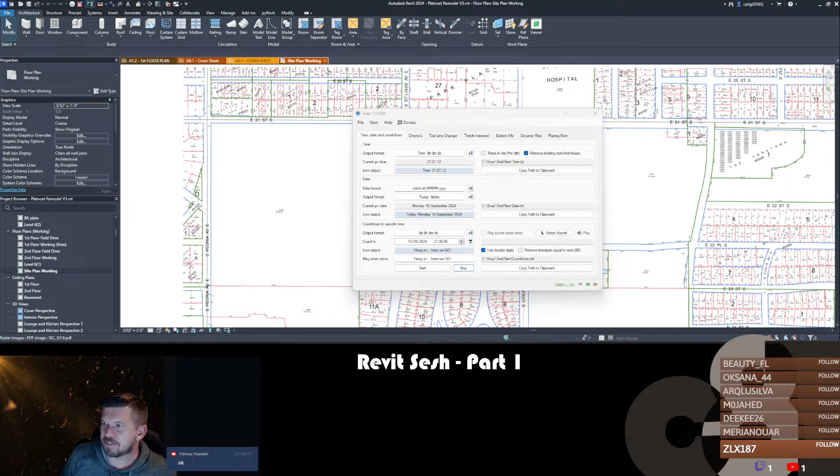This is going to be a session that is mostly for our friend, Mr. Sketchy, and so I'm going to be dealing with some of the questions that he's asked. But we will also have time in chat, if you have questions, to ask any questions you might have about Revit.

So with that in mind, I'm going to take one last stab, although I know you can't talk, Sketchy, so maybe it doesn't even matter that I cannot promote you to a stage moderator, but that's okay.

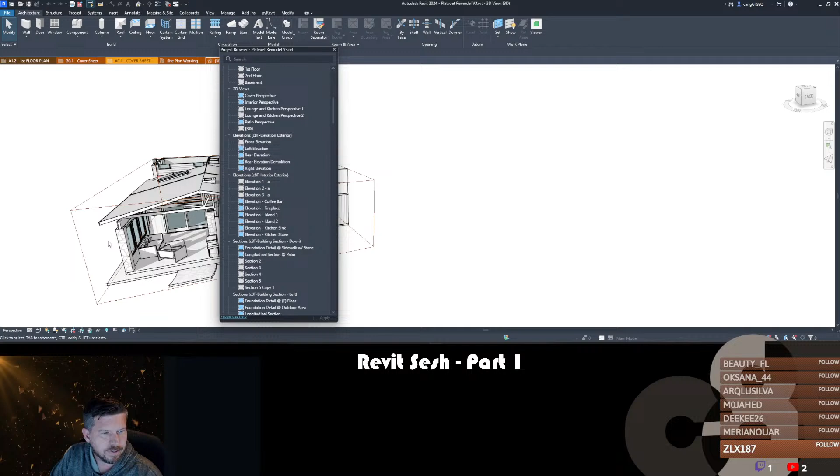And you can make it to where these panels are tabbed. Well, there we go. So now they're tabbed down here. It's a little finicky because now if I pull that out, you can see that the tabbed panels are still combined. So I actually have to rip it out of here and then redock it and then redock this. It's a little finicky. You have to kind of play around with it. There we go. And now I've got it back the way that I want.

All right. Obviously, this is your canvas, just like we talked about a second ago. Below the canvas is your canvas options. So your view options are down here. You can see that this view is in perspective mode. If I switch it to orthographic, it will show the scale. So if you're in an orthographic view, you'll show the scale down here. So if I go to a first floor plan, the scale is shown here.

You've got things like your detail level, what the view style is, hidden line, shaded, all that fun stuff, sun path, all this stuff that you can turn on and off in the view properties. This is almost like a quick access toolbar for your view properties. So that's kind of what you're looking at there.

Let's see here. Below that, we have a few things. In the bottom left, you can see it says click to select, tab for alternates, blah, blah, blah. This is going to be your informational toolbar. So like in AutoCAD, when you start a tool, you get information about how to use that tool. So if I start the floor tool, you can see here that it is now telling me pick walls to create lines. And the reason it says that is because of the way the floor tool is set up here.

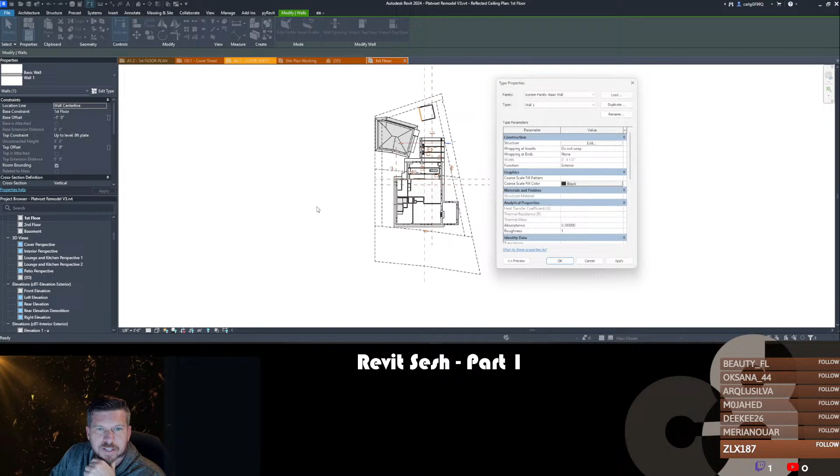And also when you select an object or when you enter a tool, your ribbon's going to change, and you're going to get a new context ribbon. The context ribbon is almost always going to be this green color. Depending on what you select, it's going to give you more context about what you have going on. So for instance, when I select this wall, I have the option to edit the profile, set a wall opening, attach or detach, things like that.

However, if I start the wall command, you can see that the context menu is more about the tool placing that wall. So what shape do I want to place it? So you want to pay attention to that when you start commands. You also want to pay attention to this options bar, which is right across the top. You can actually dock that at the bottom if you right click it. So if you like having those options at the bottom, more AutoCAD style interface, you can do that.

I will say that having it docked at the bottom does present some bugs occasionally that the only way to fix is to reset your user interface, which is never fun if you've done interface customization. So if you're working in Revit and you can't seem to find these things that you're used to seeing, look around, see if somebody's played with the interface, made some changes, things like that.

Okay. I did want to talk about the view tabs real quick. These tabs are just like browser tabs. You click on a tab, it takes you to that view. I have an extension that allows me to colorize different projects so I can see which tabs belong to which. As Dum Dum mentioned, they use PyRevit. This is an extension that automatically colors the different projects. So you can see I've got 3 different projects open.

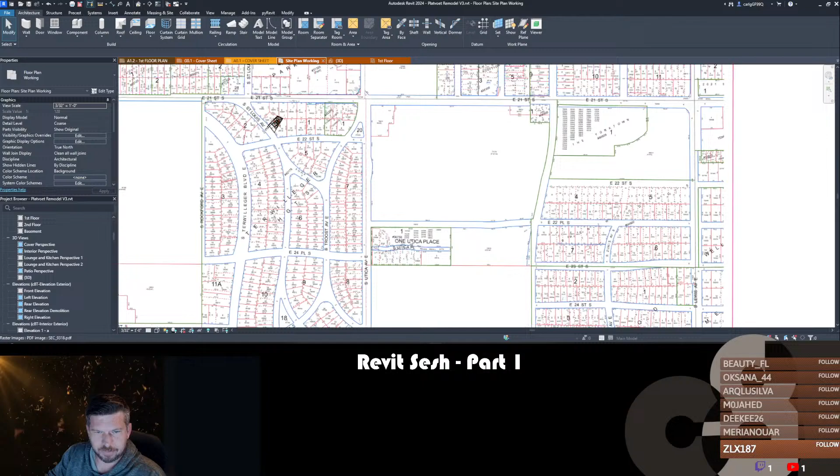So what I have here is a very large sitemap that I grabbed for one of my projects. And I'll be honest, all I did was trace over this for the purposes of this project, but you can get very specific when you are, actually, it doesn't look like I did trace this. It actually looks like I might have, oh, nope, I didn't. I sketched it. And that's fine, because I can show you how to do both of these.

So what I was looking at here, when I hit edit table, I got a warning that said it was going to convert the sketch to a table that has the bearings for the plot lines. So we might actually do that. Let me do that. I'm going to copy this. And this is going to be outside. Actually, you know what? Let's do this.

By the way, I use a lot of keyboard shortcuts. So if I do something and you're like, what did he just do? Just ask. I'll go back. We'll trace back our steps and we'll figure out what it was that I did.

I'm going to pick one of these lots that has kind of a curvy setup to it, just so that we can see what some of those look like. And I'm going to just trace over this real quick so that we have something to do. And I'm just using the create property line by sketch tool here. And I'm using snap to endpoints to snap to those ends. And then I switch to the radius tool here, and we're just going to do some snapping. I don't know what that radius is supposed to be, but that's going to be close enough.

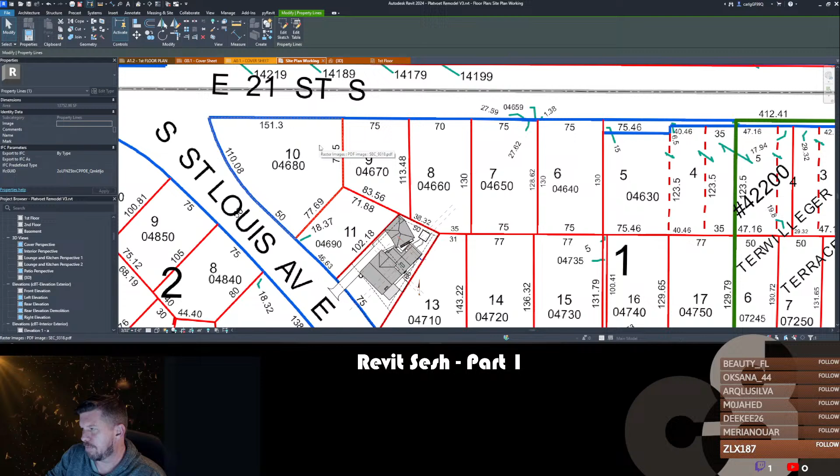And I showcase trim extend too. Yes, remind me, we might not get that today, but yes, we can talk about trim extend a little bit later. Because that actually is one thing that Sketchy wants to talk about, is things that are similar and different between Revit and AutoCAD. I don't know that trim would have fixed the problem that I just had, because I had lines that were completely missing. If they were short or long, I could have done that, but I don't think that would have fixed what I just had. But yes, trim extend is one of my favorite tools in Revit.

Okay, so I now have this property line that I made, and it's by sketch. Okay, so I'm going to hit edit table just so that we can see what this looks like in a property line, to set this up by property line. So the way that this is set up is I have a distance and I have a bearing, and this bearing is in a 360-degree compass setting. So 0 and 360 are straight up, 180 straight down, 90 is east, 270 is west, okay?

All around that way. Now, I'm just going to ask you, Sketchy, in the Philippines, how do they do bearings? Is it a northeastern, northerly line, southerly line? How do they typically show that? And while you're answering that, I'm going to go set up the units to do this in a different method that I am used to, so that I can explain that a little bit as well.

If I can remember where to find that blasted setting. Project units. I don't think this is where it's at, actually. Common. It's not. Massing and site, model site, property line data. There it is. So Sketchy, do you guys use degrees or degrees from north-south? Or the answer could be you're not sure and I just need to go over both.

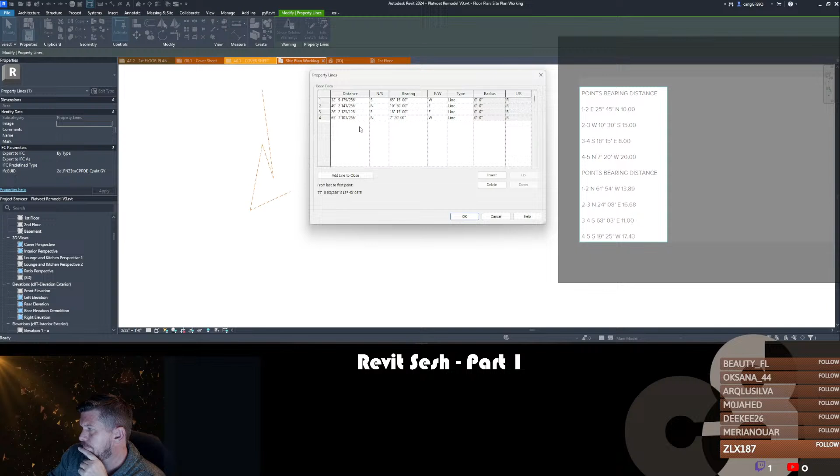65, 15. So maybe if I do, let's just see 65 and 15. So this is 25, 45 minus 90 gives us 65 and 15. And I think so 25 degrees. I believe this is the first line here, so it is going. Which one is the first line? That's that one. So I have it going south of west.

Oh, because I didn't carry the 1. This is what happens when you don't stay in school, guys. So 64 15 south of west. So we did get the right answer. I just didn't put the numbers in right. So here we go. 15 meters. And we're going to do north of east.

And then I'm going to take the 10 30. So 90 minus 10, 80, minus 1 because we have to take away from this. And so that's 30 degrees to get it to a minute. So that's going to be 79 30. Let's just see where we get there. Well, that doesn't feel right, but you know, let's see what happens.

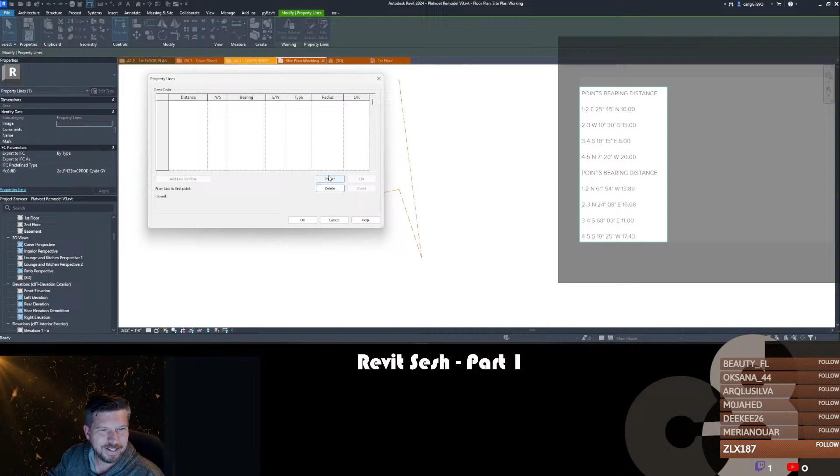So this is 13.89 meters, north 61 54 west. Okay, we got that. And then 16.68 meters north 24 08 east. And then 11 meters south 68 03 east. And then 17.43. So this is just a random sample. So there's a chance that these might not actually be accurate to begin with.

That's what I'm hearing. Can't form angular dimension. Oh, that's fine. Dadgummit. It didn't like that this dimension was connected to it. Hey, there's one. All right, let me see if this one works, and then I'll come back and do that one. So 13.89 north, 61 54 west. And I'm just using tab to go through these others.

I wonder if I didn't put meters in on one of them. So north 24 08 east, 11 meters south 68 03 east. Oh, no. Yeah, 11 meters. That's right. 17.43 meters south 19 25 west. Hey, that's pretty close. All right, it didn't quite connect the way we want to, but you can see how it begins to work.

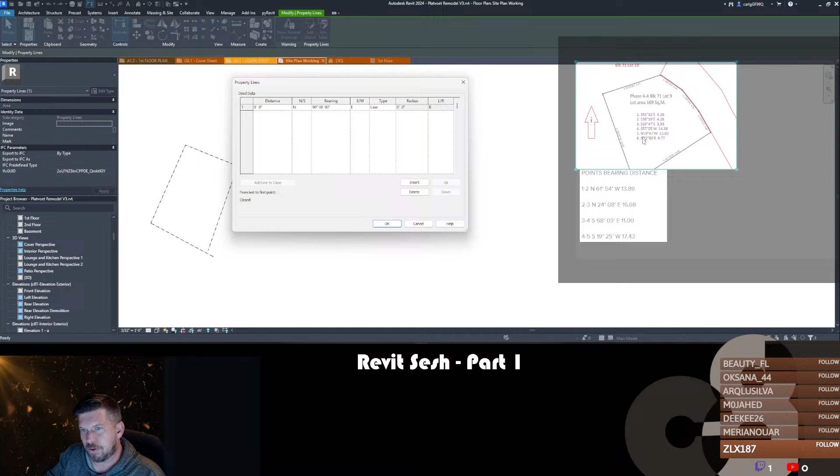So I'm going to create this by entering distances and bearings, adding those six. 4.26 meters, south 55 32 east. Then 4.26 south, 3819 east. And then 3.93 meters south, 2947 east, 14.66 meters. Oh, another south, man this property just keeps going south. 5705, ah here we go, there's the turn west. Then we've got 15 meters north, 1947 west. We've got 9.77 meters north, 7200 east.

Well, you see this one doesn't seem to want to close either. 1, 2, did I miss one? 1, 2, 3, 4, 5, 6. Did I? 1, 2, 3, 4, 5. 1, 2, 3, 4, 5, 6. Hello? There's one. Oh, it looks like I did not put meters in for one of these. How come you guys let me do that? 4.26 meters, there we go.

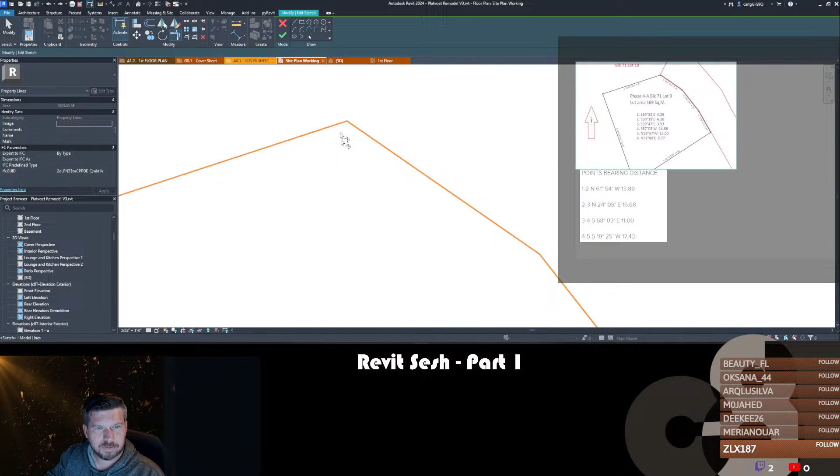That's interesting. Oh, you know what, I bet when I did the pick lines, it fixed it for us. So that's what it was in the other one. Then I can just do like that using the trim tool, which is this guy right here. Ooh, it's a lot like the fillet command in AutoCAD. Okay, so there we go.

Those are two separate ones. You can see here, this one is by table—if I hit edit table, it'll bring the table up, and there's no edit sketch, right? This one, if I select it, there's an edit sketch option. But if I wanted to, I could actually edit table, and it's going to tell you, hey, you're about to convert this to a table-based sketch, you cannot go back, which is fine. Now you can see I have the table version of that, which should be pretty close to what we have—yep, there's a 72 northeast, there's a 5532. So it is, yep, 5532, 3819, 2947, 5705, 1947. And I think the distances are going to be just a little bit different.

Okay, so does that answer your question, Sketchy, about doing property bearings in Revit? What about labeling—do you think we should go over labeling these? So we see here that we've got some labels on these lines, or do you think just sketching is going to be sufficient for what you've got?

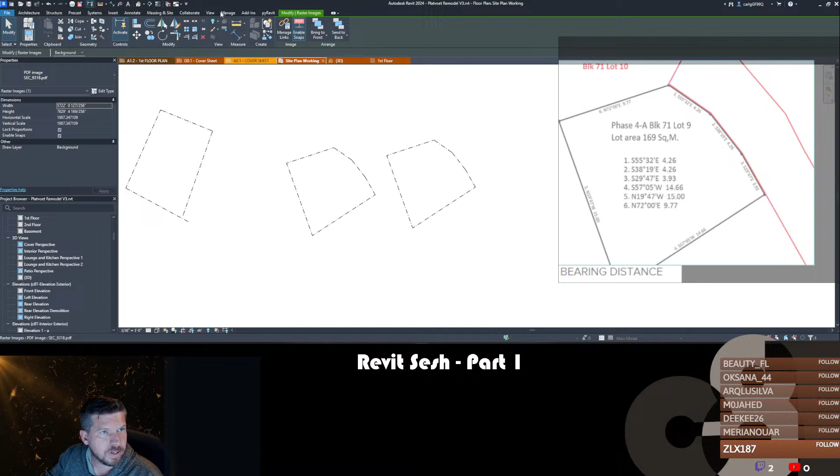Same thing with the annotations. If I go in here and use the tag tool, it's going to complain because I don't know that I have a tag for this guy. I do not, so I'm going to load one. This is where it's going to get interesting because I don't know that I actually have too many families loaded.

Because I lost all of my stuff in the great server crash of 2023 - actually the beginning of this year. Where is my stuff? Revit 2023. Here we go, so I'm just going to see if I can find a default library.

Annotations, let's see if we're going to get lucky. Is there a property line? Civil, property line tag. Yeah, that'll work, there we go. Property line tag. So I'm going to place it, and then we're going to dissect this a little bit.

We'll talk about that in a second here. So for some reason Autodesk thinks that every tag should have a leader. I tend to turn this off almost every time I tag things. But the way this tag works is you can see that I hover over a line, and it's going to label that line based on the bearings for that line.

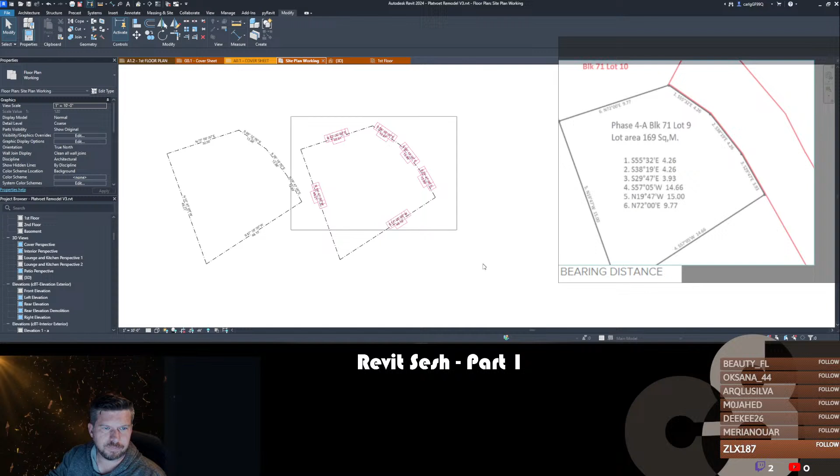So the tag for this does not care if it is by table or sketch, it will understand what that angle is. And if we go in and change this sketch a little bit, those tags will update as well, based on whatever it was. You can see that it also automatically rotated the tag appropriately. Let's look real quick at this family.

I'm just going to select that annotation and go look at the family. You can see that this is made up of several labels. Looks like we've got some visibility tags. Oh, okay, so depending on how you want to show this, we have different labels. So we have some for decimal degrees, and we have some other type.

So this one is going to be for decimal degrees. If I look at the visibility tag, we can see that that's for decimal degrees, and we've got our distance down here, which looks like it's always on. So what does that look like back over here? If I select these tags, I can change it to decimal degrees, and now we've got north 60.22 degrees east, and so forth. Okay, does that make sense?

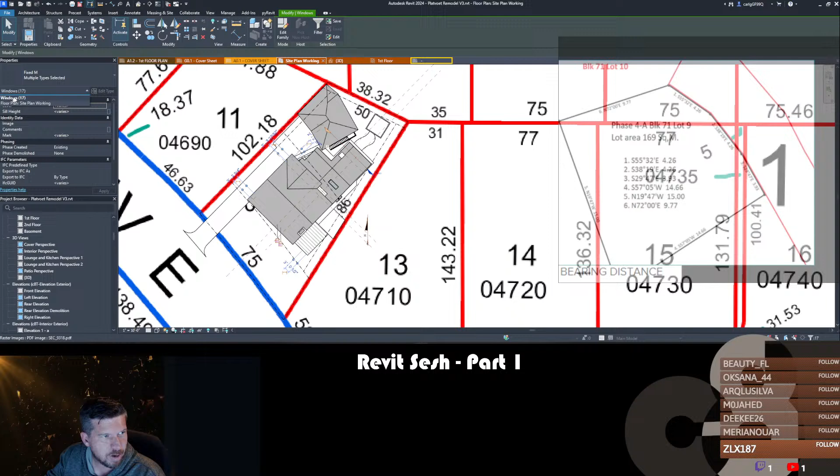Revit works off of lists in the database. So if you're ever stuck, say you're selecting a bunch of things and got multiple items and don't know where the properties are, just go look and check what you've got selected. Helpful or not, I don't know—you can use it the way you want.

So real quick, it looks like Sketchy, you want to talk about offsets as well. So let's talk about offsets, like setbacks and whatnot.

I need to do a whole series just on this. I'm actually glad we're doing this because it gives me an idea of how to filter this stuff through. So you can see I have a couple of views set up here, and the way I do setbacks might be a little different than what some other people would recommend, but let's talk about how I do this. You can see I've got one closed property line loop.

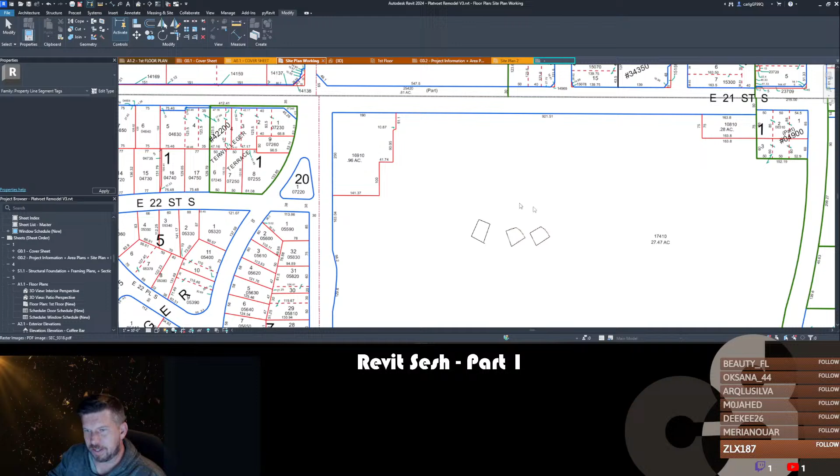So let's edit the family. Okay, see, I formatted this a little differently because this is the way I like to see it. I'm going to load this into Platvoet that we were looking at, and overwrite the existing one. You can see when I overwrite that, it actually updated my other ones as well.

Okay, so let's go look at that example that we just had. So these are property lines. Whoa. All right, fine, we'll use that view. Is this text? That is text. So if I went and did annotate tag and then selected those, you can see that it'll actually tag that setback with those coordinates, but that's not really what I want. I would just come in here and do 25-foot setback or something like that.

And I would make this my 3/32 inch annotation, I think. And I think I have one that's transparent. Yep, just like that. And maybe give it a little bit of rotation. Okay, so I can achieve the same thing just using text, whatever that is. All right. So let's go look at how I would achieve that with this other

property. Okay. Is it disorienting for me to do it in this orientation versus the orientation that I had on the other view? If I keep working from here, does that make sense to you? Or do I need to go back to the site plan where it's oriented true north-south? It's fine. Okay, that'll make it a little bit easier, a little bit cleaner. Okay, so we're going to go from there.

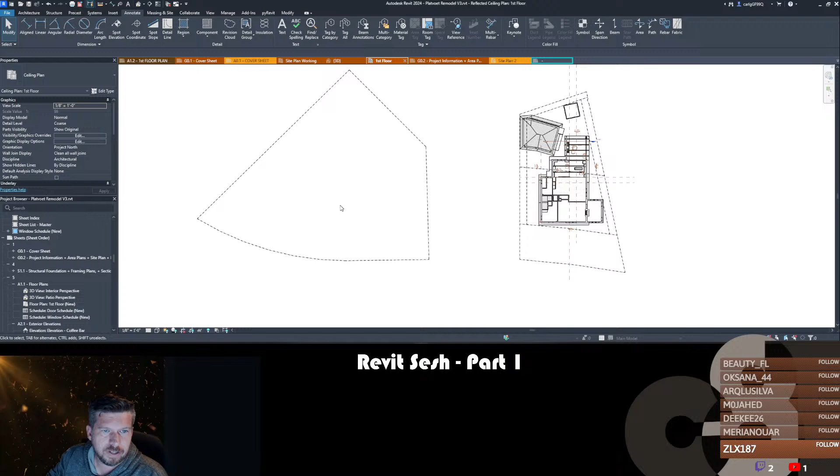For the sake of this exercise, we've got this and this. I believe this house, the driveway is here, so we're going to call this the front and this the back, so we've got side and side. And are the offsets labeled in this? I don't know that they are. So we're just going to make them up because we can do that. So let's say we've got a 25-foot setback on the front.

Okay, so what I would do is, again, I come in here and do create similar, create by sketching this time. I'm going to do pick lines, and I'm just going to set the offset at 25 feet. There we go. And I'm just going to leave that like that for now. And then let's say that, because there's utilities back there, you can actually see that this strip of land has a really big setback across the back of the property that's not even parallel with the back of the property.

Jeez. So it looks like we have like a 10-foot easement back here? Oh, 4-foot easement. Okay, so we have 4 foot. What was this across the front? Oh, this is an arc. So we could actually do this and see what the difference is. 25 foot. Okay. I just threw down some radial dimensions there to find the difference. There's not a really great way other than using the tab button to maybe see what that dimension is supposed to be to get that.

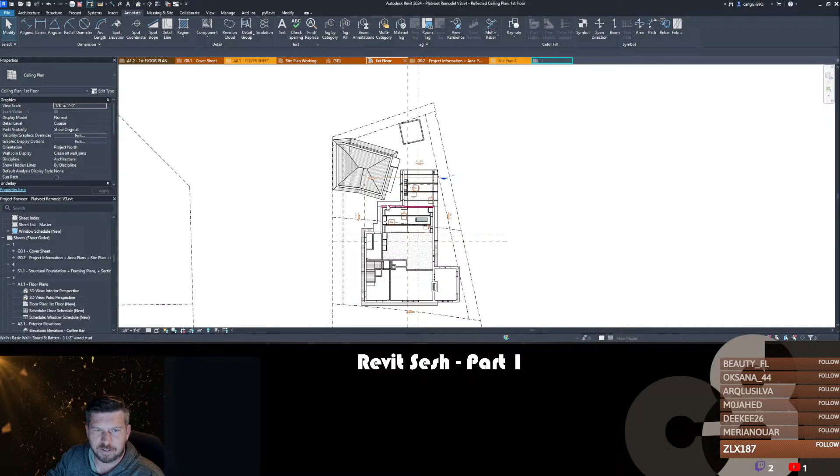And then this one's just odd. I remember this project being such a pain. Let's just do a 35-foot back easement for the house. As you can see with this project, we didn't care. We just went right into it.

Okay, so I'm going to work off of this same property line because it's front to back. And I'm going to do a 4-foot easement there. And let's just do something funky like what the other one did too, something like this. All right. And I'm just going to leave that like that for now. Okay. And then I'm going to go do another property line, again by sketch. And we're going to do some 10-foot offsets on the side yard.

And what I'm actually going to do for this, because usually the front and the back are the defining lines, I'm going to use extend, okay? And I have these set up as two different ones, extend single, extend multiple. One is XM, one is XS. So I'm going to use XM. Actually, it didn't matter. I can just use XS to do that, and then that.

And then I'm going to do the same thing. I can use XM on the back, select that as my bounding element. Boom, boom. There we go. So that's a lot like the trim extend feature in AutoCAD. Not to be confused with the trim feature in Revit because it is very different.

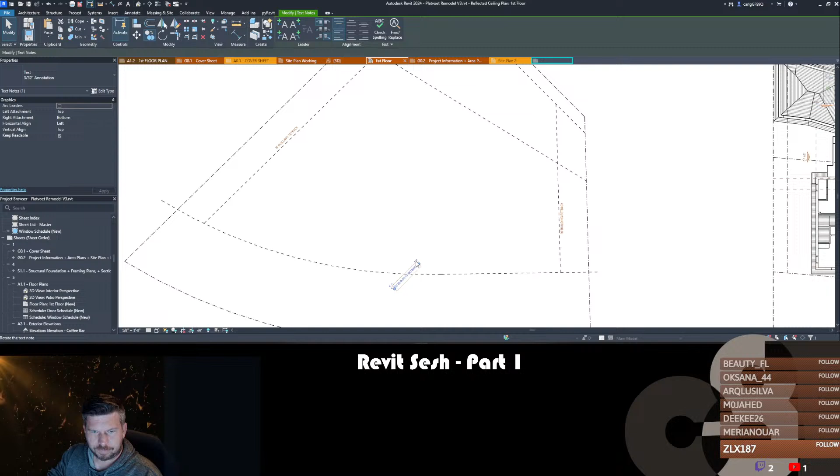I do kind of miss my tag, but it was such a pain to maintain that. But it was nice that it kind of oriented itself automatically. Put easements. Some weird rear setback. Right.

All right, so there's the annotations and the building setbacks. Did that cover everything? Did it bring up any more questions about property lines and setbacks? So that puts us 1 hour into this, and we've answered question one.

Do you want to do contours real quick, or do you want to move on to like initial setup of projects? I say real quick. Contours are not a quick topic, so if that's kind of a low priority item... well, yeah, of course I could. You tell me what the priority is for you. There's a question on here that I think is pretty interesting. Stuff done differently in Revit versus AutoCAD.

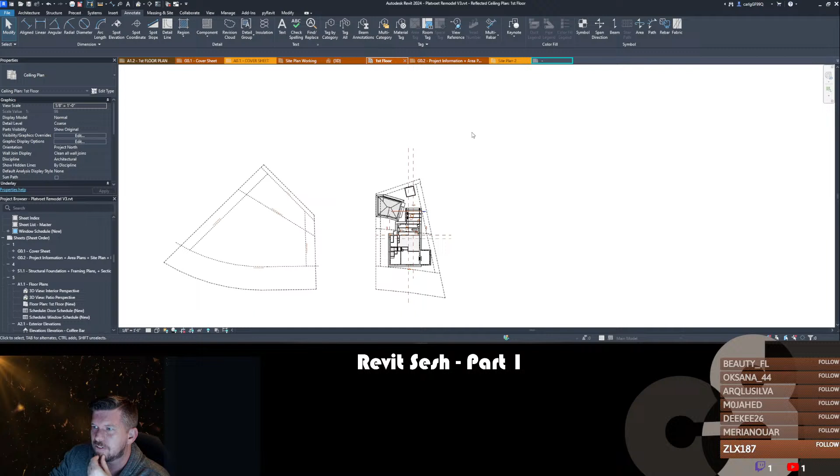Annotating and showing details, I feel like that would be more practical. Okay, so let's talk, I guess. So when you say annotating, just generally annotating a project or setting things up like sections, elevations, callouts for details, things like that? Dimensions, just generally annotating a sheet. Yeah, let's go with one of my favorite projects. Okay.

So a couple things to keep in mind. Something that is very similar between Revit and AutoCAD is that you have model space and sheet space. Because I typed all this manually on AutoCAD, all the dimensions and whatnot. Ooh. Okay. Well, you might like this then. Okay, that's actually a really good point. So this is going to fall a little bit into your other question about things that are different between Revit and AutoCAD, and things to avoid, to not have a hard time.

One of the first things to avoid is thinking that it is AutoCAD. Some of the people having the hardest time with Revit are the people who are trying so hard to make it work like AutoCAD that they get frustrated about it not working that way. So when I'm explaining Revit to somebody that's coming from AutoCAD, I ask them to step back and think of Revit not as a drafting tool, but as a database. So every view that you're looking at in Revit is a window into that database from a specific perspective.

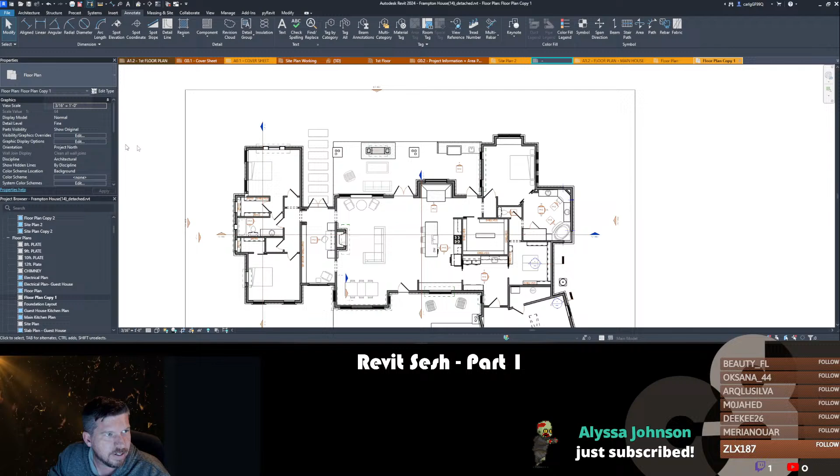So if you use the aligned dimension, okay. When you say DI, you mean the linear dimension? Oh, you mean the keyboard shortcut? Yeah, I use DI also. So a couple things to keep in mind. Always check up here in your options. How do you want to dimension? Do you want to be to the wall center lines, to the face of core, wall faces, center of core? Understand the difference between these and which one you want to use. I like face of core because that's how we frame things here in the United States. And I'm going to be able to click each of these faces of core.

So first dimension for me, always overall. So longest dimension. Okay, I'm going to ignore that garage for now because it's kind of an odd shape. Boom, there's my first dimension. All right, next hierarchy for me is going to be the big bumps. So I'm going to go here, here, here, here. And notice that I'm doing this in one string, not multiple strings.

Okay. This is another big mistake that I think a lot of AutoCAD users make when coming into Revit: they come in here and they make this dimension. And then they make this dimension. Then they make this dimension. Then they make this dimension. And to me, that's just a mistake, because then if you want to move these, you've got to select all of them and then move them and lock them. And yeah, it locks in place. All right.

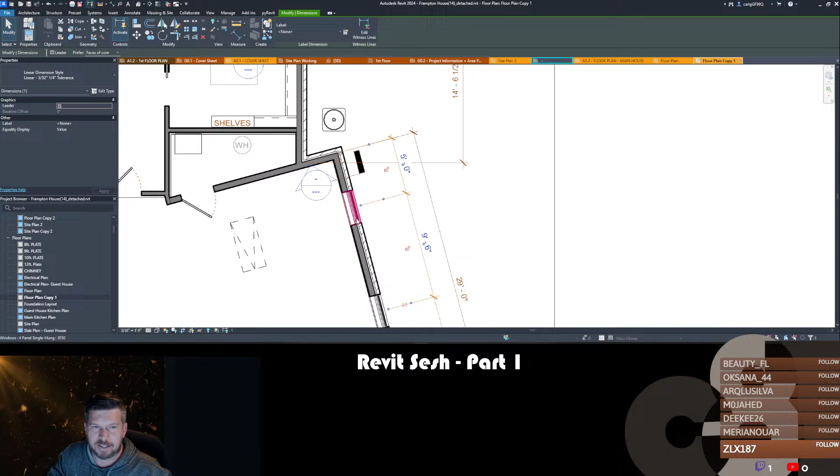So a couple things real quick to edit these dimension lines. These grips, the end ones first of all, you can drag those to kind of bring it off of your object a little bit if you want. Okay. But these middle ones, you can drag that to witness to something else. Okay. You can also click it to toggle between different faces. So you can see this is the face of my core. This is the center of my core, and these are the other faces of my core.

If I have this set to the face of the wall, when I click that, it'll toggle to the other face of the wall. So if I come here and then click that, whoop, hello. Well, it doesn't want to go to the other face of the wall here. Interesting. I don't know why, but it just doesn't want to. Oh, there we go. It was because I was on the end of a wall.

So now you can see, actually, it toggled back to the face of the core. Actually, it looks like it's the face of the core there too. So maybe if you dimension to the face of the core and then you click it or you change it, it's gonna go back to the default. But same thing with openings. If I click that, it's going to toggle between left, right, center of that. So if I want to measure the opening instead of to the center, I can do that.

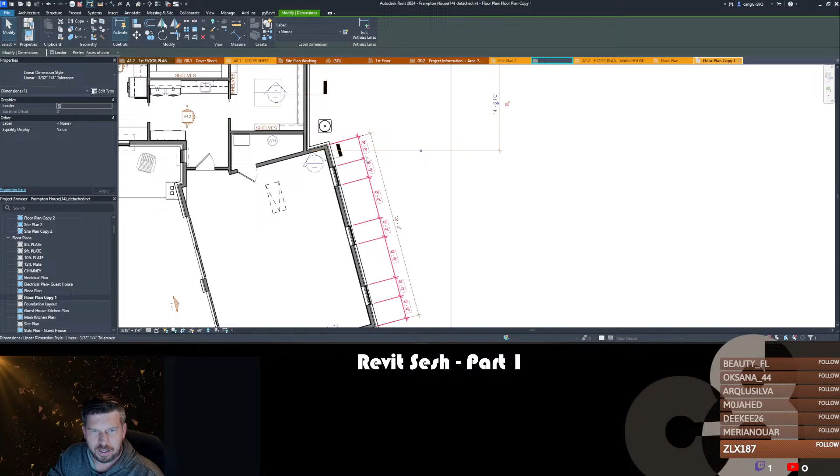Let's see here. What else is something that... Oh, yeah, so that is something here. So if I wanted to, let's see, bring this out here. If I wanted to dimension this, I'm going to use edit witness line. And if I wanted to dimension to the corner of the framing, I can use tab to make sure that I'm hitting the end of it. So just like that. There we go. And just like that. Okay. And I think I didn't get lucky. The reason that is a nice clean dimension is because I'm using a rounded dimension.

So if you're like me and you're a real stickler about the fractions or the way things are rounded off, obviously if you're in metric, it's not going to be as big of a deal because you like those decimals in your dimensions. But you can mix and match dimension styles. So I can delete that segment, and now I'm going to have two different segments to these two different parts of the building. So I've got this dimension here, which is not rounded, and then I know that this is at an angle, so I can select this dimension and set it to a different dimension type that has rounded dimensions.

Yeah, Encore, you can share that. We're not going to go over it right now. Maybe before the end of the stream, if we have time, we'll go over it. I really want to get through these questions that Sketchy had asked, but if you want to share that in support, I don't know if the community stage is set up for you to drop images in, but you can try. If you can do an image, I don't know if PDF will really help us. We'll see. Yeah, drop that in there. If we have time, we'll be sure we go over that.

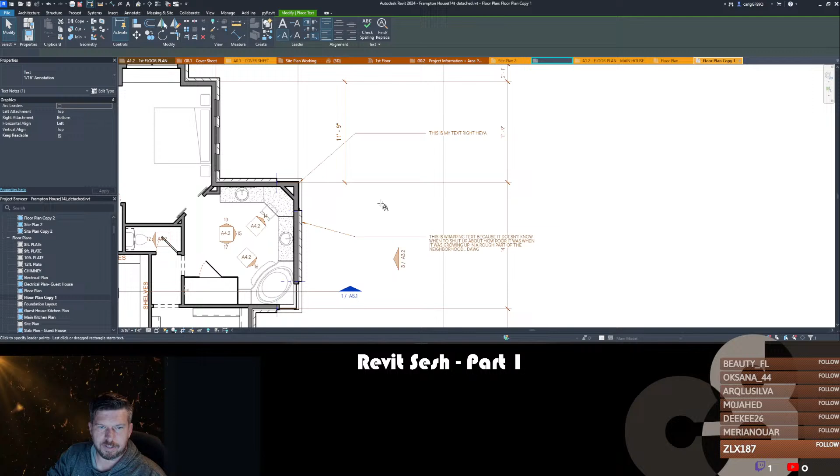All right, so we set the wrapping there. This is helpful when your text kind of goes off and doesn't fit on the sheet. Yes, create similar, boom, boom.

Another thing I like to do with text, if I know I'll have a lot of similar items, especially in sections, is use the copy command and do multiple - just boom, boom, boom, straight down the line. You can see I did a bad job of this, but the good news is in Revit I can just drag that and it'll snap to align. Then I'll just put in the text I need.

And then apparently you'll crash Revit. I might have actually just crashed Revit by using the text command. Oh, it's saving. Well, yeah, I definitely don't want to do that. Cancel, please. Oh, thank goodness, that would have sucked - this is an actual project.

Okay, so copy multiple works wonders. Let's talk about annotations that are tags - using tag by category. So this is the kind of dumb thing about Revit: we have tags by category, and I can tag furniture, walls, windows, doors, but I can't tag rooms using this. That's because I have to use the room tag tool instead. For some reason, room tags are out in the architecture tab, not the annotate tab. So if I want to tag rooms...

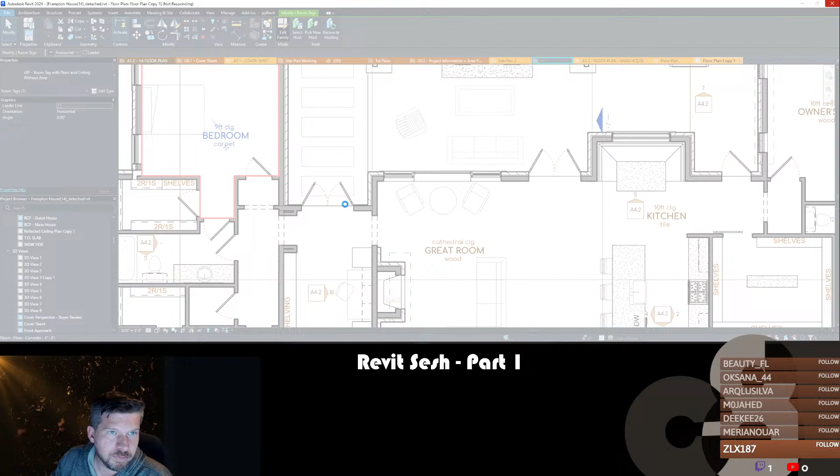Quick tip there - you can actually right click on the Revit icon and open a second instance of Revit. This is a really good way if you have multiple linked models and want to work on both at the same time.

I wonder if this one - oh, it opened, okay, that was faster. So room tag, you can see here that I've got - yeah, me too, that's why I like doing these, just to show there might be different ways of doing this. So you can see I've got different labels.

These pull from different parameters of the room object - the area. I believe this one is like the description - nope, that one's actually called floor finish. And this one I think is comments. And then obviously room name.

So if we go back and look at that, you can see where that comes in. If I look at the room object itself, you can see I have the floor finish parameter called wood, comments cathedral ceiling - that's just the way we've got it set up. That's how I use those parameters, but you don't have to use them that way. There's a lot of slots in there for whatever information works for you.

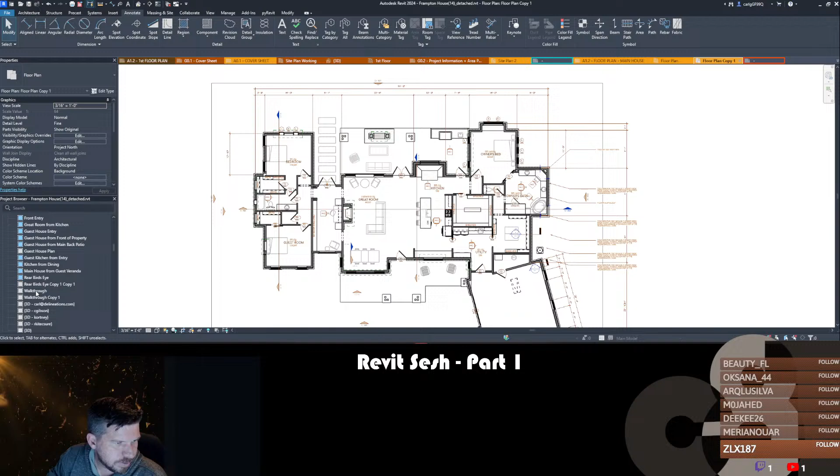Let's find an elevation. So front elevation main. Let's duplicate this because it's already got tags on it. Okay, so you'll see that I've got windows across the front, but because this view is actually deep, right, it has depth to it, there are windows on the sides that I can't see.

So if I do a tag all windows, and it's going to be objects in the current view, and I hit OK, you'll see that it actually tagged windows around the side, right? Because it doesn't know that we can't see those. Revit is like, well, it's in the view, I can see it, so I'm going to tag it. So you just have to be aware of that, right?

And then I can use our selection hack that we talked about earlier. I can just select all that right there. Oh, looks like I got that extra tag. And then I can do filter, check none, window tag, select that, and delete. There we go.

All right, the other thing that I can do is, let's say that I go in, there's only one door in this view. Let's say, okay, well, let's just do this.

Let's say that I only want to tag the windows that I have selected. So, oh my goodness. Go. Tab is your friend in Revit, if you haven't figured that out already. Right, so I only have these showing up here.

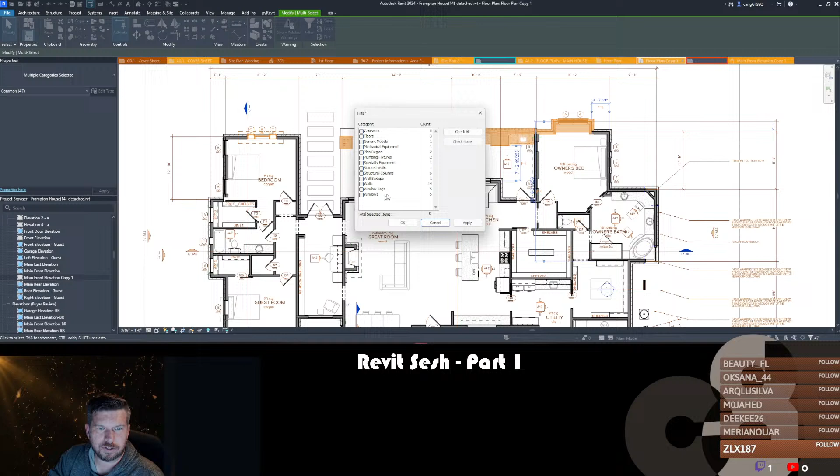But what I'll usually do sometimes is I'll come through and I'll just select all the tags like across the back. It'll be filter, check none, window tags, right? And then because I know those are all the same offset off that object, I'll just use my arrow keys to nudge those up.

And the same thing like in the elevation, see how all these tags are kind of, they're not reading very well because they're in the middle of that division. So I'll select the ones that are kind of messed up that way, and I'll just nudge them down. Or if there's a middle mullion or muntin, I'll just nudge them left or right so that they're readable that way. But I would try to do that on as many objects as I could at once.

All right, we did tags, we did dimensions. I'm not going to go through my hierarchy of dimensioning because that's a whole theory and documentation of its own.

Let's see here. I went over text, labels, everything, call outs, things like this.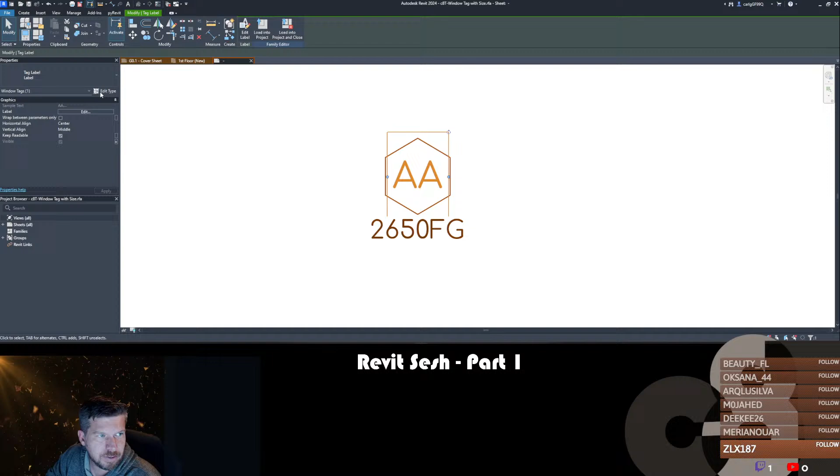So if I wanted to be able to set this on an object, you can see my label here is transparent, right? So I can go control that again. I'm in the label, I go into edit type, I make that opaque. I can even show a border if I want to. I'm looking to see text size, tab size. You might be able to control some of it using this in terms of how much extra padding you get around the letter. But you can see that would be your wipeout.

Now, if I really wanted to, I think I can come in here and make a masking region. So we're just going to make a masking region that's the same size as our tag here, and I'm going to load that in. And now we have that quote unquote wipeout there, and that was a masking region. So I think that's what you're asking. If it's not, let me know, and we can back up and go over that.

There's that tag. What else do I have labeled in here? Door tags, window tags, dimensions. I've got sections and elevations as well. I think those are pretty straightforward in terms of how to place them. But let's look at an elevation and see if there's anything else annotation wise that we should go over. I can already think of a couple things.

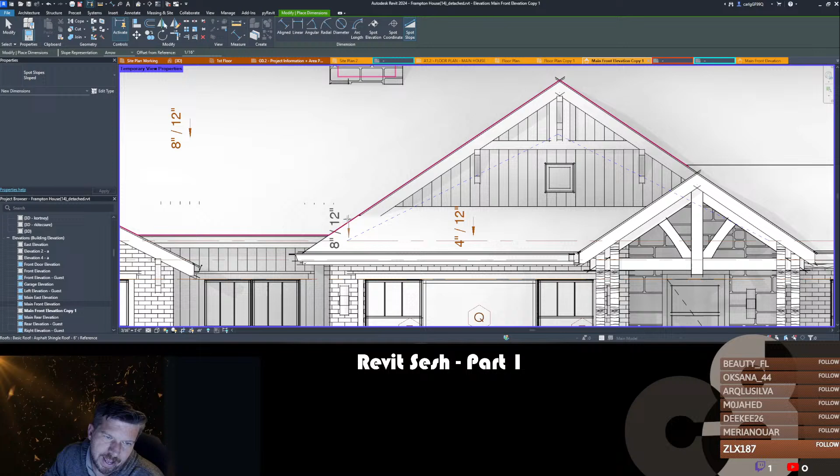So you can see here, if I hover over this, I get 8/12, right? And this is just a straight gable roof, the elevation of a gable roof. But here, where we have a hip, where we have two slopes coming together, you can see it gives me a different slope. And Revit is kind of dumb this way in that for some reason the default that it gives you is not the face, but the actual ridge of that line. So it actually gives you the angle, the slope of that hip line.

So what you have to do is be sure you hit tab to make sure you're getting the slope of that actual line. You can actually see I get a couple different ones. So I'm getting the line for the hip, and then I'm getting the valley. You can see the magenta line goes up to the ridge there. And I can show you by going 3D here. So the 3.5, the slope is actually this line right here, and that 5.5 is actually this valley right here.

I think I can actually maybe lock this and demonstrate that. See if it'll let me do that. Yeah. So if I do a slope here, there we go. So you can see the 3.5 is there. Yes, thank you. And then the 5.5 is there. But if I go here, that's 8, and this is 4. Okay. This again, so it's easier to see.

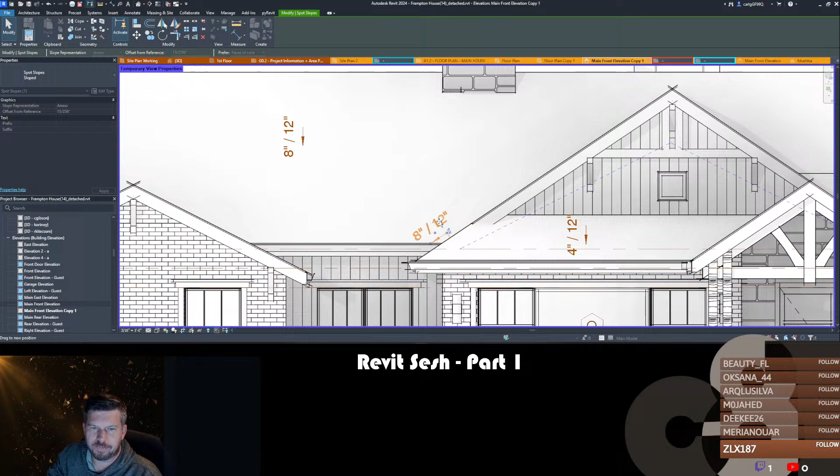Okay. So you can kind of see, despite the color contrast not really coming out well, that's what you're seeing if you ever have that issue. So you want to pay attention to that because you can get in this rhythm where you're just like click, click, click, click, right? And then all of a sudden your boss is like, there's no way that this is a 3.5 inch slope. So you want to be sure when you're doing hipped roofs that you do tab a couple times. Hopefully you know what your roof slope is, so you can kind of check that as you're doing it.

In this case, I probably would have put these up here anyway. Oh, you can see it grabbed the wrong one. Exactly why you gotta pay attention to it. All right. So anyway, I go through and I do that. So I got another one over here. Okay. And then what I like to do, oh, I missed a couple. Can't believe you let me miss a couple.

Right. And then for my gable slopes, I'll just go through and batch select those. So I'm just holding down Control, and I change those from arrow to triangle. And if you need to make that triangle a little bit bigger, you can do that. There's not a precise setting for that, so you just kind of have to eyeball it. But you can also set by default what that size is. I think leader length, text size. There is something here where you can set the size of that by default. I've done it before. I can't remember exactly what it is.

Same thing with this leader, right? You can extend that to make it work a little bit better. And that's just kind of step by step going through and hitting those.

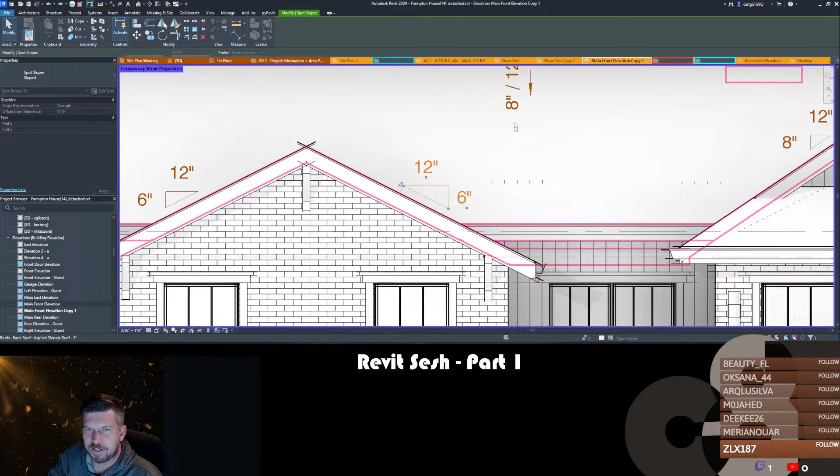That's a good question. Let's find out. So DumDum's asking about whether or not match properties will work. So match properties is this guy right here. It's MA on my keyboard command. So I'm going to do MA there. Nope, does not work. I remember thinking about trying that before and was very disappointed when I found out that it does not work. Yeah, there's some weird things that MA does not work for. That's pretty frustrating.

I can go over this real quick. If your levels are conflicting with each other, you can just really quickly give it a shoulder. Always be sure you get that first shoulder and then the second shoulder. If you do this one first, you will not be able to extend beyond a vertical line. So this is how you control your height, right? So you always want to select this one first and adjust it, and then there you go, like that. And then you can also go the opposite direction if you need to.

All right, what else? It's not exhaustive, but that's a lot of the stuff that we have. Are there any specific annotations or labels, Sketchy, that you wanted to look at?

I'm going to go look through the rest of the set to see. Encore, you should be able to post in support. Yeah. Should be able to.

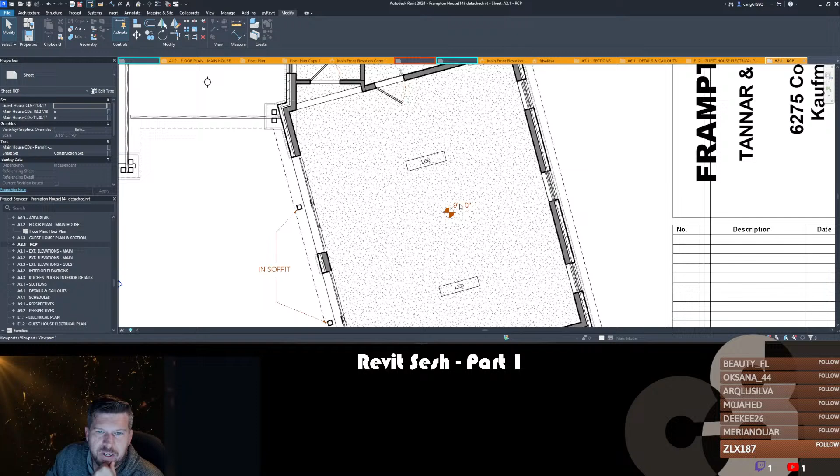Yeah, I'm glad those are helpful. Yeah, let's see here. What else is on? Maintaining plans. We talked about that. What not to forget on initial setup. Let's talk about initial setup of a project real quick.

Whenever I start a new project, which I may or may not be able to do right now because I don't have any freaking templates. I don't know if I can find my template real quick. Nope. I know I've got a copy of it somewhere because I recently sent it to my office. Right. Just so that I don't waste too much of everybody's time. There's Revit here. Families. Nope.

All right. I'm just going to use a default template. Templates. Default. English Imperial. Use residential default projects. There we go. All right. So some of this stuff is going to be specific to me. Some of it's going to be universal. So take this kind of with a grain of salt.

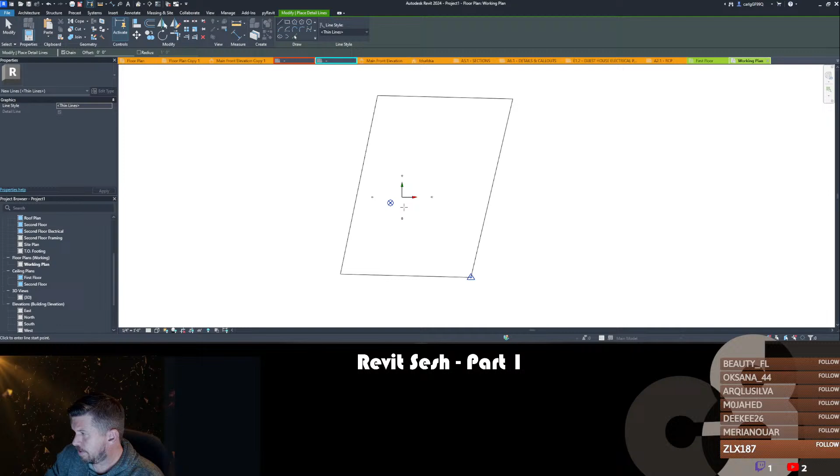And let's say that my base point is going to be like the left wall of where things go. So let's say that this is my true north, I guess is what we're trying to say. Okay. If my project north is going to be a little bit different, let's say that the front of the property slopes this way, I'm going to set my project north up. So rotate project north. Okay.

And there's a couple ways I can do it. I can select a line or I can rotate it 90 degrees. So in this case, I'm going to select this line. There we go. Right. And now I've got project north, there we go. We've got this set up and site north, true north.

Okay, just like that. So when I'm working on my floor plan, I want everything to be orthogonal to that front wall. I'm going to be working in project north. My site plan is going to be in true north. Why do I want to set this up early in the project?

Well, a couple reasons. One, if I do not set this up to begin with, and I do my property lines in project north, and then I rotate the true north to try to get it right, all those bearings are going to be off. So I have to make sure that my property lines are set in a true north view to actual true north bearings, right? Otherwise, everything's going to be jacked up when you try to get that right.

The other reason is when you do rotate project north, man, I wish there was a really easy way to show this. Let me see if I can. Is that the wall command? What kind of wall am I making? I'm just going to see if I can get this to demonstrate for me.

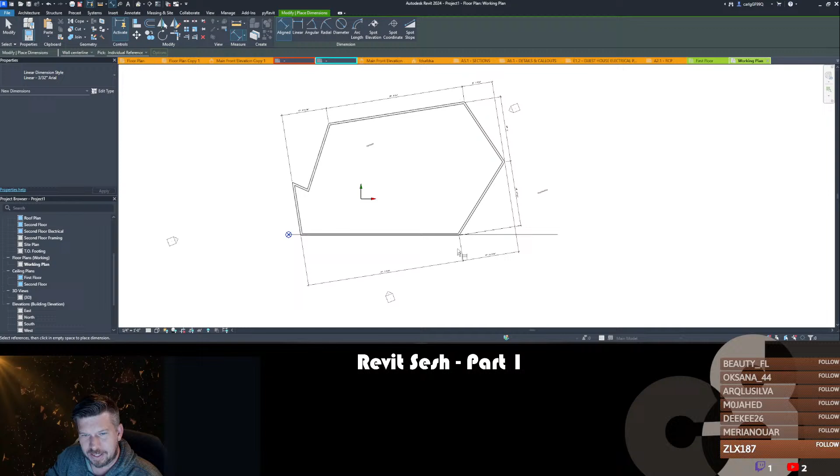So let's see. Some of these objects are going to rotate, some are not. So if I do position, oh goodness, I have to have project north turned on. Oh, alrighty. So you can see now those objects rotated, but if I want to dimension this, yeah, it's very contemporary. If I wanted to dimension this in this view to this orientation, now I'm redimensioning this in that orientation, right? And you can see all my text is messed up.

So we got to make sure we have that set up right before we really get to working. I do have some projects where I don't worry about this. They might be remodels for interior or something like that. But if you're dealing with site coordinates and bearings and whatnot, you want to be sure that you've got that set up that way.

What else was I talking about? Oh, when we're setting stuff up. That's really kind of it. Hopefully you've got stuff already in the template. There are some things that I start out with, like making that working plan view. I make sure that all my sheets are set up. So if I don't have sheets, that'll be one of the first things that I do. I'll bring my title block in, make sure that that's got all the information that I need in it.

If we have project number, so project number I put in there, I might make a little splash sheet. So that's something that's pretty useful sometimes. So if I go view, drafting view, don't do what I just did. Actually name your drawings. So splash view. All right. And then we just put some text in here.

Some of the snap keyboard shortcuts that I use very often: snaps off, to turn snaps off so they don't accidentally snap to something. Also, snap end and snap mid I use a lot. So if I'm drawing a line or a wall and I want to filter only end snaps, I type SE. If I do SM, now it's mids only, right? Or I actually use snap perpendicular. So I could do SP, and now it's going to snap perpendicular to that line, even though it's an extension of that.

So I would look through your keyboard shortcuts, KS for keyboard shortcuts, and just see what's in there. It's a very exhaustive list. You can look for snap. Oh goodness, snap end. Endpoints. Okay, so snap is not in there, just endpoints. Look through that.

Oh, things to do at the beginning of a project. Draw some walls. First of all, if you know what type of walls or construction you're going to have, make sure you have those walls and assemblies. Go through and make those first. That way, you're not having to draw things and then go through and add, because it's brick and now everything is different because you used a different wall type.

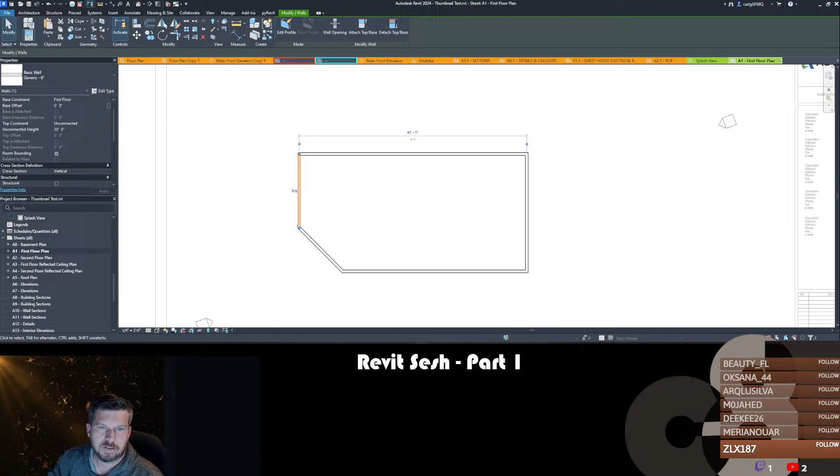In Revit, the thing that you're moving is going to be the thing that you select. For some reason, a lot of people also have a dimension here, and they think in order to move this wall, they have to select this dimension. That's not how it works. You want to select the thing you want to move, and then you can type in the new dimension. Yeah, I think that's awesome.

Selection by face, disallow drag. Oh yeah, always turn off drag elements on selection so that you don't accidentally do this, when you just single click and drag. I just turned that off. That's the first thing I do anytime I open Revit for the first time. Selection by face, you can turn that off. So if it gets really annoying when you're hovering over things and you don't want everything selecting, you can turn that off, so you're only selecting things by edge.

A good example of that is, let's say you're in a floor plan view that actually has something in it. Okay. So see that the floors are not being selected. But as soon as I turn that on, it's going to be hovering over the floors also. So right now I cannot select a floor. It keeps wanting to grab that room. So pay attention to those things. For some reason Revit thinks everybody loves that option, so they have it on by default. So you can turn that off.

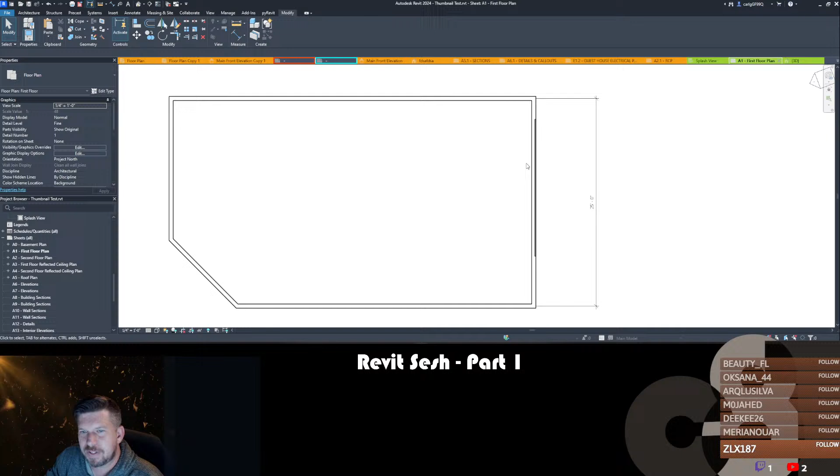Do I have a project that has a curtain wall already in it? Let me just look and see, because I don't want to have to make a new one. Okay, there we go. Oh, this is our new floor plan. I just move this out here.

Crop views. Do you know how to crop views, sketchy? You understand how to turn those on and off and control them?

All right, so pinned objects in a curtain wall by default, your objects that are defined inside the curtain wall type are going to be pinned. So like right now I can select that, but if I want to make sure that I'm not accidentally selecting those objects, so like now I cannot select that pinned object. Same thing with the panels. Like I can't even tab through and select them. So if you find yourself not being able to select something, it might be part of a system. So just be sure you've got that pinned objects turned on and off. Okay. If you think of something else specific, let me know.

In the meantime, I'm going to jump over here and grab this curtain wall that Encore wants to look at. And we're just going to do a quick how-to-model-some-curtain-walls session.

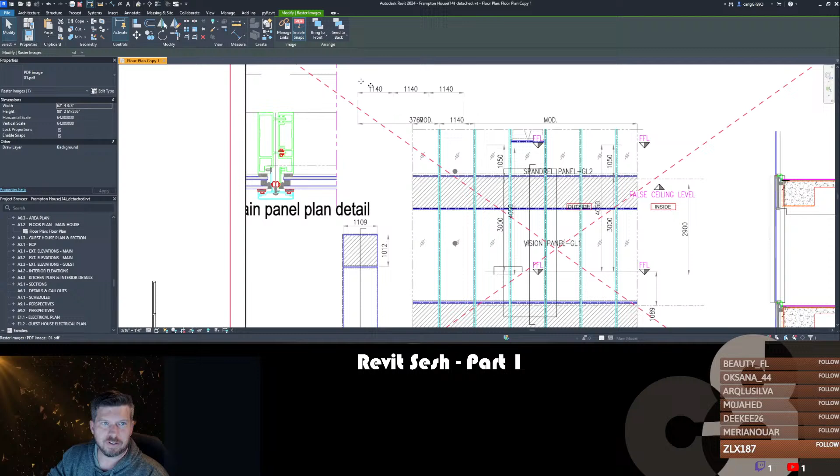Drop that in, rotate that, and now we've got a reference inside of Revit that we can use. If this is a vector PDF, you can enable snaps, which allows you to snap to points. This is a vector PDF - if it's not, you will not be able to snap to things.

So let's see, what are we trying to model here? I want to go back and see - they said, can I share a PDF of a curtain wall family, which I'm having a hard time making. I would really appreciate it. So the thing about curtain walls is that they're nested assemblies.

That's it. I'm afraid to know what a pancit is. That must be a Filipino thing.

Okay, so the thing about curtain walls is that there's multiple families going on here. I'm going to rotate this 90 degrees. So we've got the wall itself, which has a type, and we have curtain panels, which is a family.

Oh, okay. Ooh, that looks pretty good. Although if it's spicy, I will grin and bear it, but it might not be my favorite thing.

We have mullion types, which are profiles - they're their own thing. Okay, so I'm going to start very simple with this, and we'll go from there.

It looks like, what does MOD mean? Does that mean similar, like you're going to continue that module, the 1140 module? I bet it means modular, so you're going to continue that module through that. And then we also have what looks to be - well, what are these dimensions even to? I don't know.

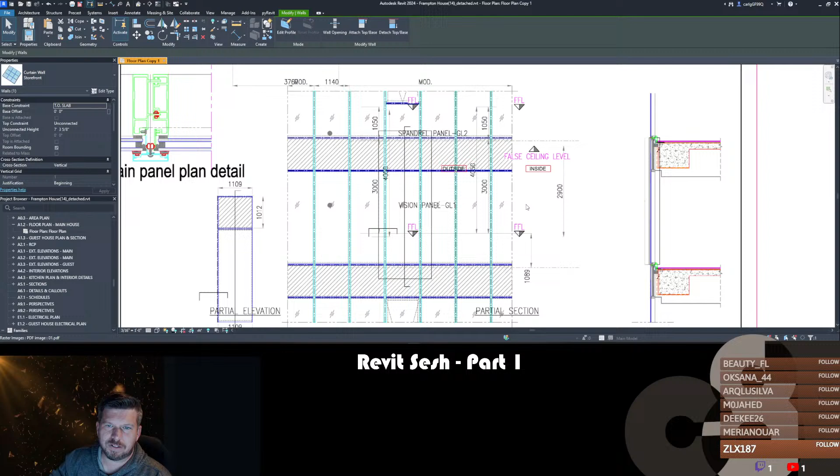Elevation 1109, 1140, 1012. This might be kind of tough to model out because I'm not seeing a lot of information on what these modules should be. I see the dimensions for where the false ceiling is, but what I really need are the dimensions for where these lines are.

And you know, honestly, we can probably scale this. Let's see - if I scale this, we're going to go from here. I'm going to guess here. 1140 - what would that be, centimeters? Seem right? Oh that looks... I think that's no, it's got to be millimeters, right?

Okay, it feels a little better. Yeah. Just curious, what would that be? 3'8" - yeah, it sounds about right. And then this is probably like 3 foot something. Yeah.

Level height is... zoomed way out. Level height is something like, yeah, 12 foot. Okay, yeah, that feels about right. Let's see, we've got a section view here. The first thing I'm going to worry about is getting the pattern correct as we do this.

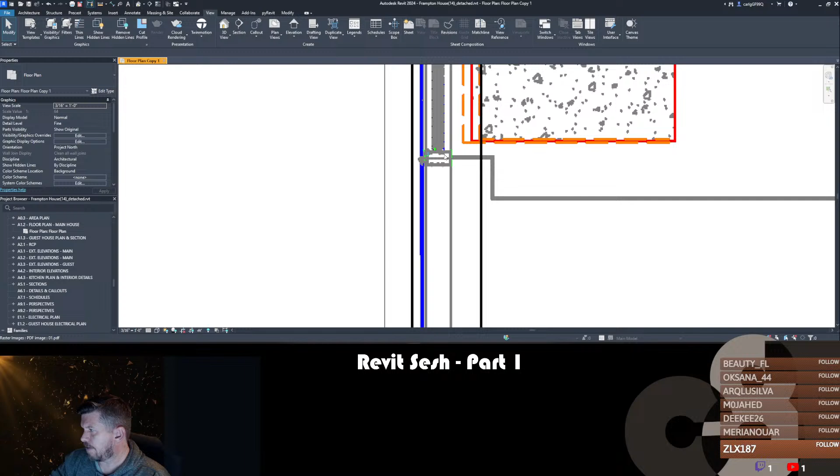Oh, this is a raster image. Oh, this one's a raster image too - oh look, you can snap the raster images too. This doesn't have a lot of detail into it. Yeah, so you're not going to model all that, right? But you can actually make this show up when you cut the profile. There's some things you can do with that.

I'm going to start simple, and we'll see how far we get as we do this. Okay, so we're going to start simple, and we're going to make it a little bit more complicated as we go. So one thing I'm going to do - as much as I hate doing this - I'm going to start in a new project. Ugh.

I'm going to copy some stuff over so we don't have to start from blank. So, Imperial, I'm going to do commercial defaults. Actually, I think that might have a curtain wall in it.

Let me see what we've got built in here. Look at that, we've got something we can start from. Okay, I'm just going to copy this to another place. So when you cut a section, you're wanting this to show up.

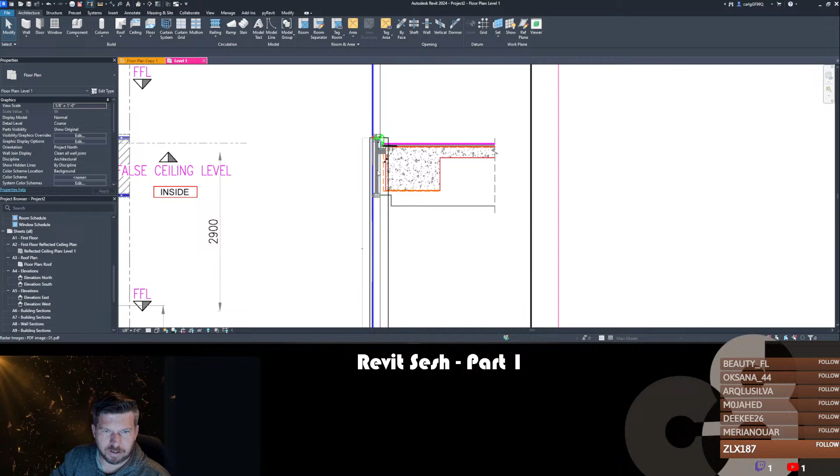Something like that. Yep, all that detail. Okay, we're going to focus on the curtain wall.

Now the problem with the PDF you sent, well, is it a problem with the PDF or is it a problem with the way I imported it? Let's see, if I load this at 300 DPI, because I think I did 150 before. Let's do 600 DPI. The problem is I can't really see what that detail is. So let's see if maybe - it's not a whole lot better.

Actually, here we can just copy that. Yeah, but the problem is the PDF you sent me - like this is what the scale looks like when I do that, you see it, I can't see that detail. So I don't know what I can really - these are the fittings you're wanting to show, the connection back to the slab. Yeah, you want to send the DWG, that would help.

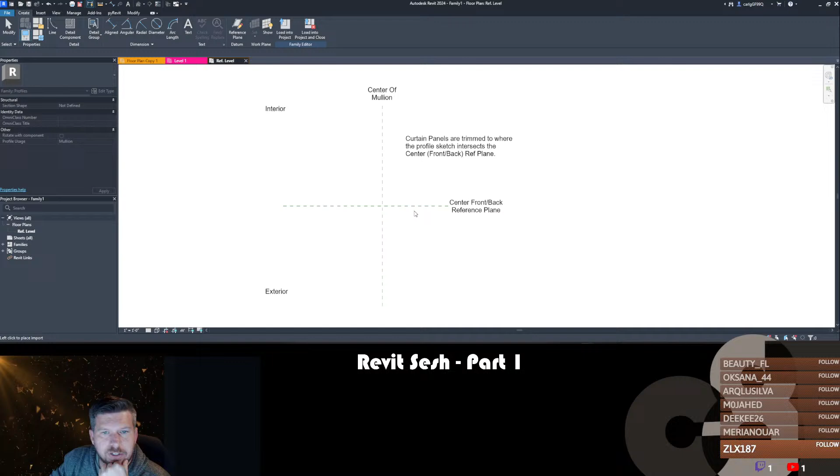DWG, and we're going to go profile, mullion, open it. Then I'm just going to drag that DWG into here. Just kidding.

It really doesn't like that. Really? What in the world? It's not supposed to do that, right? It's supposed to go to the folder. Yeah, like that.

Am I just - okay, so it did import this several times. It's just way up here, for some reason.

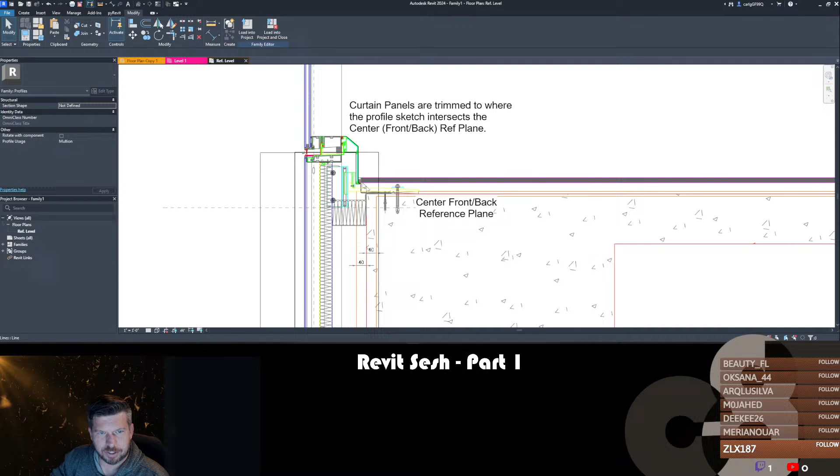Is that what you're wanting to show also? Okay. Or can it be that we don't need to model all this and you just need to show this detail when you cut the panel? Which of those options is it? I think I know the answer, so I'm going to start with that one.

That means use this one, right? Okay, so I'm going to bring this over here to my origin. And what I want to be aware of is what is my origin for this, right? Well, it looks like we have a front-loaded panel glazing, which means it's on the outside, it's not centered or anything like that. So I believe we're going to let that be our origin, the front of glazing.

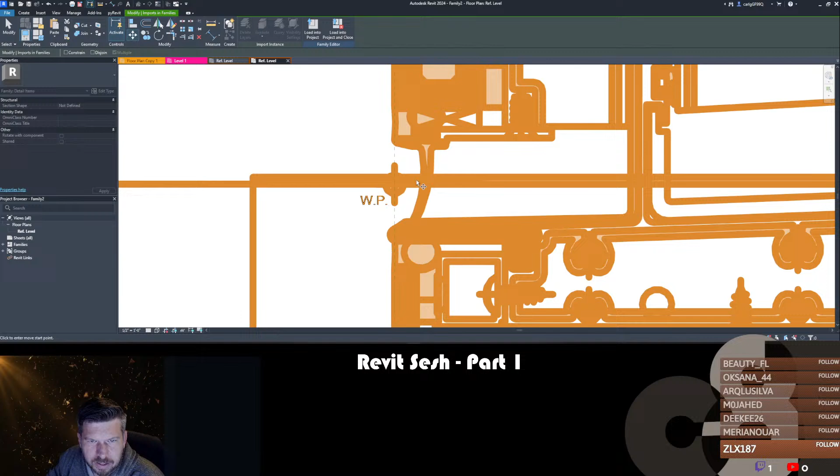Yeah, so I'm going to move this over here, right? And then where do our panels meet here? And I believe we want that to be this intersection, right.

And I'm using the thin lines tool to make this a little bit more clear as I'm drafting this. I think we need to find the midpoint between these two panels. So I'm going to put this here and here. I think maybe it wants to be 1 inch. We might call this good enough.

I wonder if I put this right here. Yeah, that's what we're going to do. You see how that's almost right there on that. So that's what we're going to do. I'm going to move this. I'm going to use the midpoint of that, and we're going to move that down to that point right there. And this is going to determine where we have this profile, or where we have this detail in our profile. Okay. It looks like it's going to be very similar down here also.

Now, what I would probably do from here is I would set up some different line types. Okay, so I would set up some categories in my detail components. What am I looking for? Object styles, categories, detail items. I think manage object styles, that's what I'm looking for. So we've got heavy lines, light lines, medium lines, things like that. And I'd go through and I'd set those things up, making sure that when I draw these,

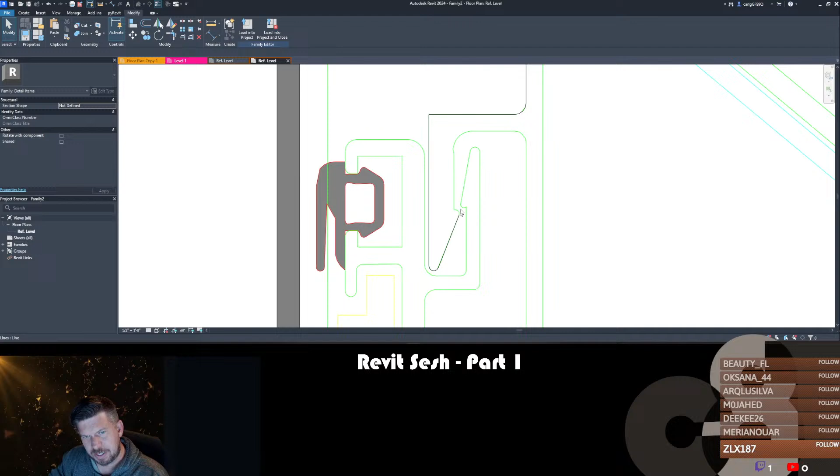they show up correct. So I can either use the pick lines tool, or not. I don't know why I can't pick that line. I can trace over it. And this is why sometimes I don't use the pick line tool, because sometimes it doesn't get you where you need to be. Okay, so I can use the pick line tool to start setting some of this stuff up, right? And you can get a lot of the way there, but you're going to find that you do run into some limitations in what Revit can do with those pick lines. So you are going to end up needing to come back and redo some of that.

I'm not sure where along this path. Oh, it seems like right there it doesn't like that. So we're going to have to come back and fix that. Right? And you can do these in separate pieces. Okay, I'm going to have to come back and fix that because it's smaller than 1/32 of an inch. It doesn't like this one. Okay, so a lot of these we're just going to have to come back and fix later on.

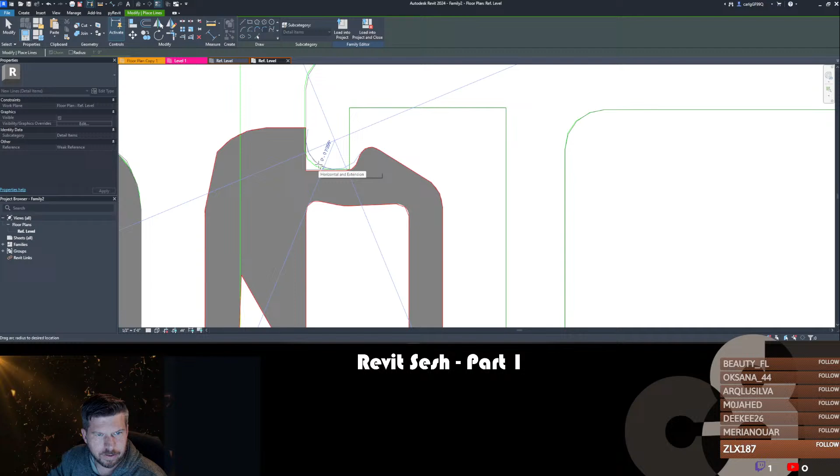You can always also do these in individual pieces, right? So I'm just going to do this all in one go here. I'm just going to trim this instead of making it curved. I don't know that we'll be able to actually draw that curved piece there. Yeah. I do fillet right here. I can, yeah, I can do one. There we go. So I can go back and do that if we really want to.

Let's see here. It's really weird that I can't select these pieces. It's also interesting that it just kind of disappears. It's almost like this piece isn't formed quite right. Do I have chain turned on? I do. Oh, do I already have lines here? I do. Okay. So I'm not going to worry about that. Let's just look and see where we're at. We're pretty far from where we want to be.

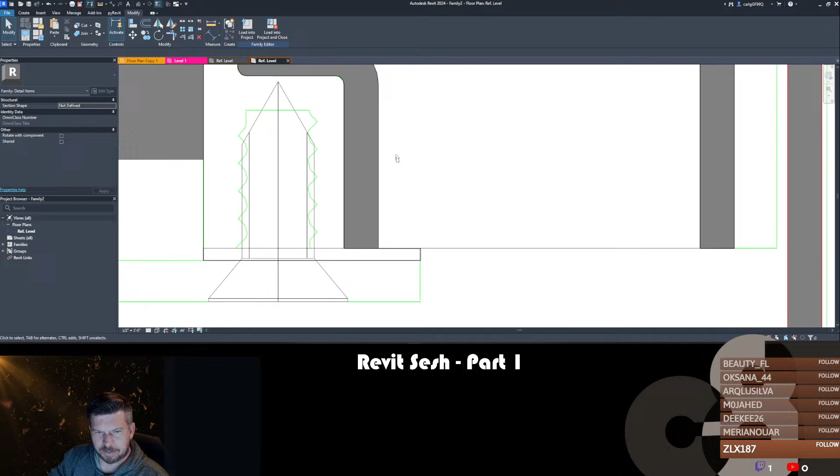I'm just going to get a general shape here because this method will apply to the rest of the project as well. Just go down here. Man, this is such a weird drawing. Yes, it does this. I don't know. It's not going to like that. Yep. I have found that sometimes if you draw an element that's shorter than what Revit likes,

No, I would never recommend exploding a DWG because it creates categories that you will never be able to get rid of. In fact, I just had to deal with this recently on a project where we kept getting dinged in quality because a DWG kept showing up in the import list that wasn't actually there, that we couldn't get rid of because the category was permanently there. So it showed that the DWG was loaded and it wasn't. So, yeah, no, do not explode DWGs in your Revit file.

I'm going to get this to where it just looks kind of okay enough when we bring it in. So like that. I want to get a closed piece here. In hindsight, I probably would go and do maybe these different pieces individually. We got those.

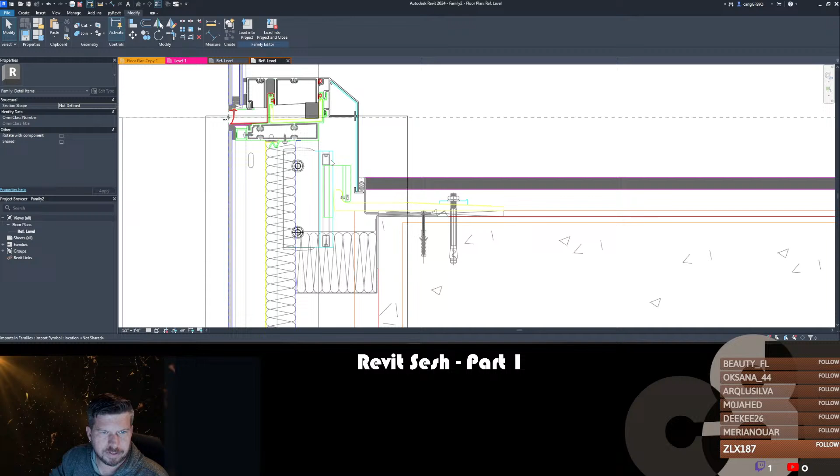Let's see. Let's do this piece that comes back into the slab, this embed. Oh my. I'll be really surprised if it gives me all that. Holy cow. Okay, it didn't give me all of that, but it gave me enough. I'm just going to do this.

Whatever, man. How are we getting close?

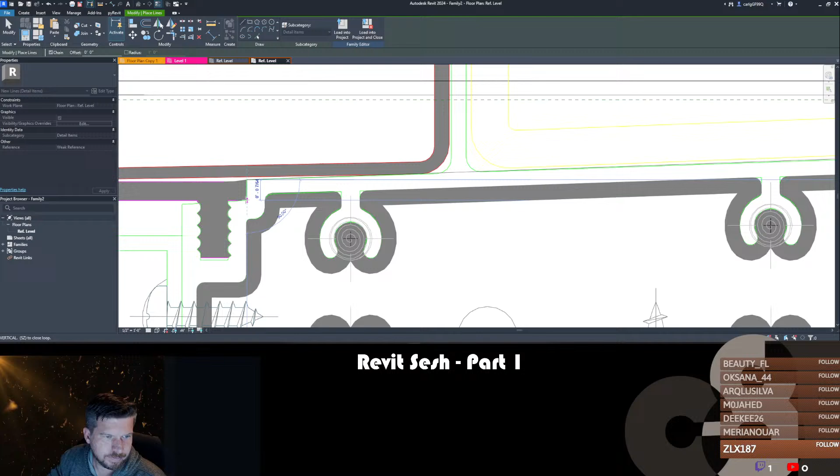Well, that's really disappointing that it doesn't want to let you draw these lines. I'm just going to get something close so that we can move on with how this works. Because, oh boy, I can see why you were struggling with this.

But I can also say with certainty that you might want to question whether or not you actually want this detail to show up everywhere you cut this wall, or if you just want it to show up in one detail. Okay. Oh, that was interesting. Yeah, that means we're going to have fun when we actually load this in. You guys see how that was disappearing?

Okay, so I'm going to leave this kind of as it is, right? You get the idea. You're gonna draw all this stuff in, and this is in a detail item project. So here we go. Well, you're not going to model all this, or else you're going to have a model that crashes. But I'll show you how this will show up when you cut the model. So let's go to projects.

It's 2024, right? Let's go Encore panel. And we're going to call this a floor connector detail item just to keep it kind of descriptive. Yeah, that's the word I'm looking for. All right, so now I think what I want is this my profile? This is my profile. Okay.

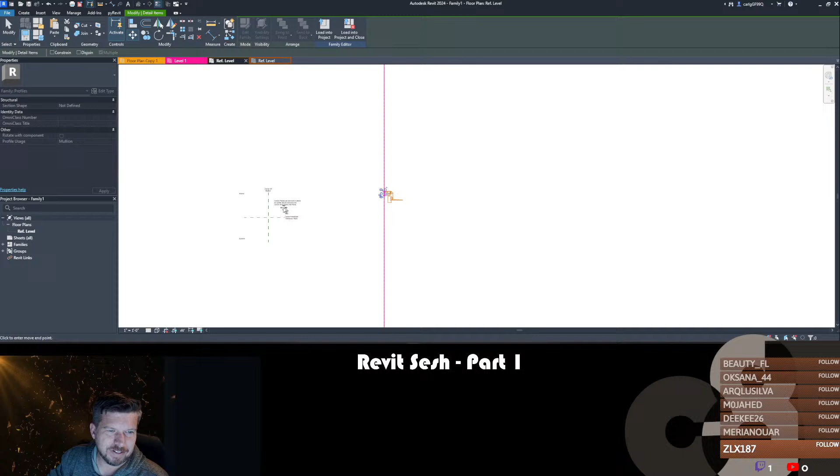So now I'm going to load this into, I think it's family one. Yikes. Do I have another copy of that somewhere? This is family one. So let's load this in to family one. And then we're going to insert detail components. Oh boy, why is it doing this? That's why you don't import the drawings like that into Revit. Okay, so I'm going to drop that right there. Let me go see why it's doing that. Did I hide? Oh yeah, I did. I hid that. Let's save that, load it back in.

Families are similar to SketchUp components, right? If I want to draw something custom, it'll always be a family classified as generic model. Not necessarily. So we have all these categories. If you want something custom, you're going to categorize it based on what it is. If it's furniture, you want it to be furniture. Now, that being said, generic model is a good place to start. You can always change the category later on.

Okay. So curtain walls are kind of a complex place to start because it's like a family nested into a family nested into an assembly. So in this case, I've just made a detail component and I've nested that into a profile family. So now I'm going to create the profile of what the model piece is actually going to be. And this is going to be very janky. This is not going to be very clean, but it's going to get the idea across for now.

So I'm basically just going to create a loop. I'm not going to go through and get all of these clip lines and things like that. I'm just going to get a loop. Encore, when you do this, if you want to make this a lot more precise, you can do that. But for now, I'm just going to get this to where we can demonstrate what we want to do, including a demonstration of why you don't want quite so much detail in a profile family like this.

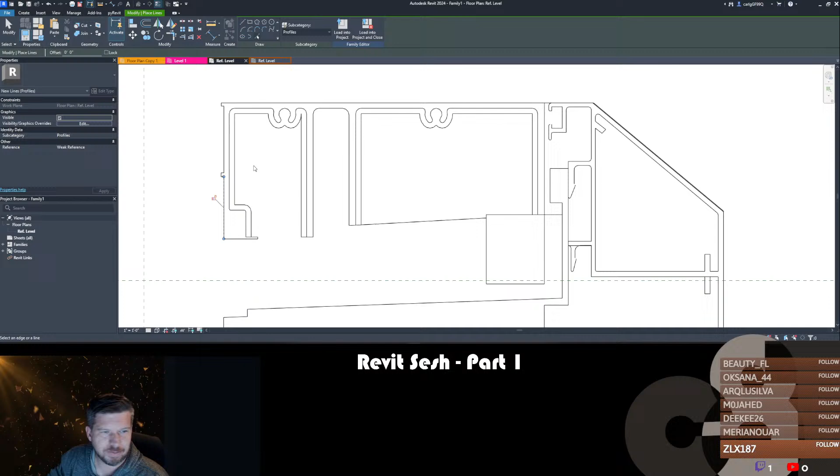Okay, so I'm going to hide this, and then I'm just going to use my trim tool to clean up this profile a little bit. Right, and then I'm going to hover over and hit tab to make sure I do have a closed loop. And this is going to be offset from the origin. So this is going to be the origin of where that mullion happens. So let's bring this back.

And we're going to save this as horizontal floor connector mullion. Spell that right? I think I did. Okay, we're going to load that in the project. Project 2, I think. And there's a couple things that we're going to need to do here.

The first thing that I need to do is set up, let's bring this guy here just so we can see it as a reference. I'm just copy pasting that. Oh, I didn't bring the DWG into here. Insert, link CAD, not import.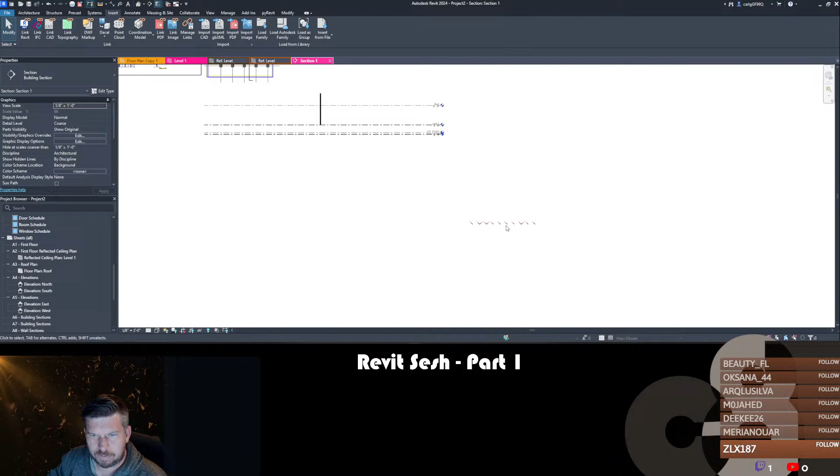Oh, wait. Well, I can select pinned objects. Why can't I select this? There's something jacked up with your DWG, my man. Next. There's something messed up with your DWG. Anyway, I can't even do this. Let's bring the PDF back, because as bad as it is, at least I can manipulate it.

All right, so I'm just going to bring this right here, and let's look at, let's bring this floor. Oh, do we not have snaps? This guy up to here. This up to, this up to here. Actually, we're gonna go all the way up. And let's look and see.

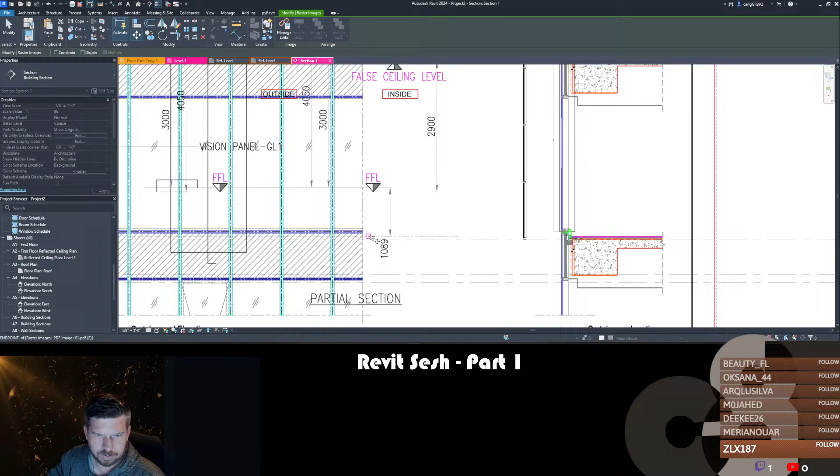So it looks like we have, I move this. Wait, why are these not lined up? That's going to make this very different. Oh, okay, I see. That's the finished floor. Okay, we can work with that. So I'm going to make a reference plane and bring this right across here. Let's line that up here.

All right, so our bottom mullion, okay, we're going to make a new mullion type. We're going to call this, call that sad mullion. We're going to unpin that. And then, oh my goodness. Is there a reason you're not going to let me? Okay, there we go. Now I can duplicate that. And we're going to call this floor connector mullion. And we're going to set the profile to horizontal floor connector mullion. Right? See where that gets us?

Okay, we're flipped. Actually, we're flipped and rotated. Did I draw this? Did you guys let me draw this wrong? Interior. Look at that. You guys let me draw this wrong. You guys are horrible. Horrible, horrible friends.

Right. Well, the good news is there's an easy solution to this. We're just going to mirror it across here. That. Save that. Load it into our project. Oh, actually, yeah, you guys are really, really bad friends. Because look, this is the interior and this is the exterior. And this is the center of the mullion. Man, I cannot believe you guys.

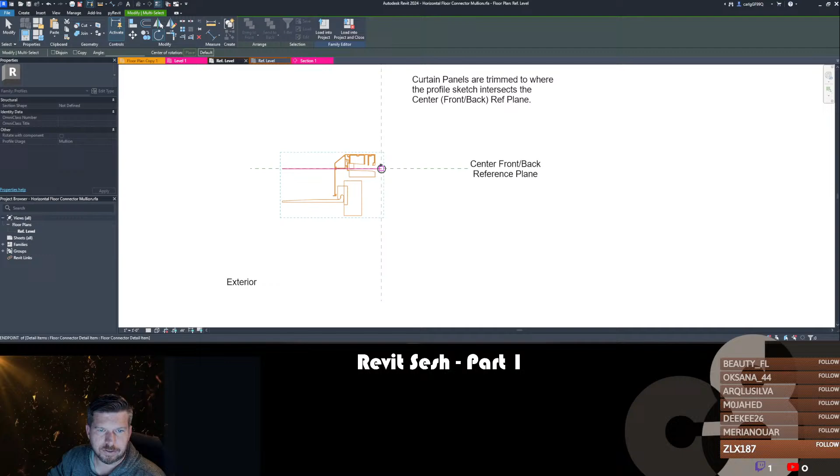All right, so I'm going to rotate this 90 degrees this way. Right? And then I'm going to flip it because I think this is going to end up being the top and the bottom. Right? So we're going to mirror it here, turn copy off. There we go. I think this gets us where we need to be.

Yeah, good luck. You see how much I'm having to relearn doing this? This is not something that you do daily that becomes practiced. It's something that you get to stumble through multiple times as you do this over and over again.

Okay. So we're going to bring that back in. And hopefully now, when I go look at that section, oh, it's flipped. I was so close. Oh, no, don't want to copy. Flip. It is a little weird. That's front back. Exterior. Oh. Yep. Nope, this is right. Okay. I was looking at it backwards. Although maybe I wasn't. I don't know. That's a little weird. But we want it to be natively the correct orientation. So there we go. All right.

So you can see my offset is like way up here. So we're going to need to figure out what that offset is and why it's doing that. If I bring this down here, it should bring it down. So we'll figure that out. Okay. But you can see here that there's a lot of detail that came in, right? Now, if I go in to this view and I turn off detail items, yep, there we go. So this is just what the profile looks like. I don't want to save this right now.

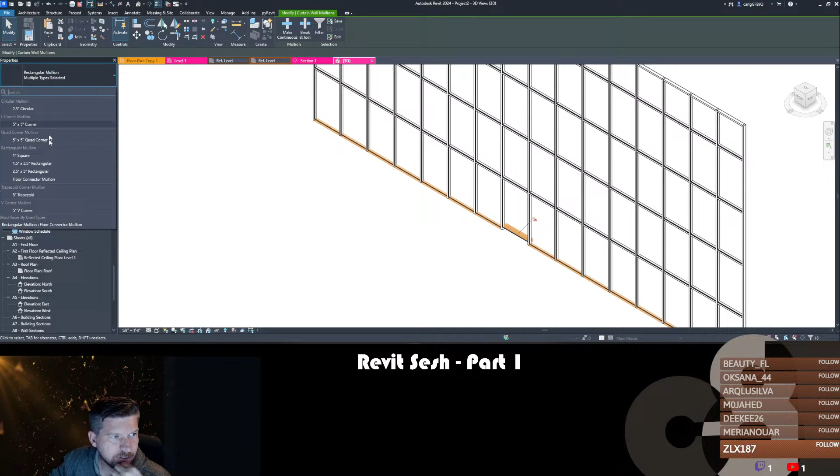Okay. So if I go look at that one, I'm going to do select mullions on grid line. We're going to unpin that bad boy. And we're going to call this there. Okay, so we can kind of see what that begins to look like. All right. And we want this to be continuous. Okay, so we can select all mullions on grid line, make continuous. There we go. Okay. So yeah, you're not going to see all that detail on the inside.

All right. But when I go into this section, if I turn detail items on, boom, there it is. Okay. Now, what you're going to have to deal with is if we go and turn curtain wall mullions off. Okay, it turns it off. So you're going to have to figure out your compromise in your line work between the detail and not detail. That makes sense or not.

Okay, so let's go through and we're gonna bring this down. Okay, so how do we get this to line up with what we've got here? Well, we want our mullion, okay, and our panel to break right there. So we're going. I lost my other one. There we go.

Okay. So there's ways that you're going to set this up to be a specific pattern. Right now it's set to the vertical and horizontal grid to be a certain pattern. For now, I'm going to set this to none. All right. And it's going to complain, do you want to delete the grid line or not? I don't want to delete the grid line right now.

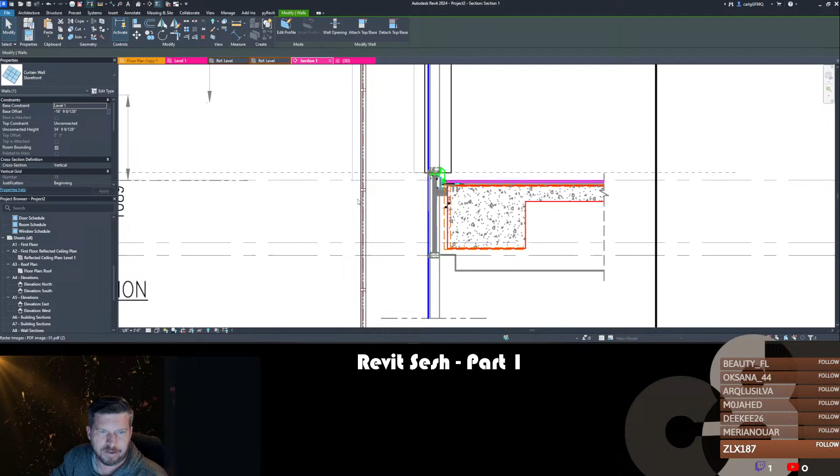I just want to take this grid line and I'm actually going to do what we just did a second ago. I'm going to take these mullions on grid line, unpin them, and unpin, and set them to this guy, right? Now I want to move this up to here. I think it's just that bottom one that didn't want to do it, right?

Oh, yeah, that's what it is. It has to do with where that line was that we created right there. So it's because it's the bottom one that it didn't want to do that. You see how this one is centered on that grid line? That's what we want. Okay. And so then we've got our panel, which as we can see is a lot thicker here.

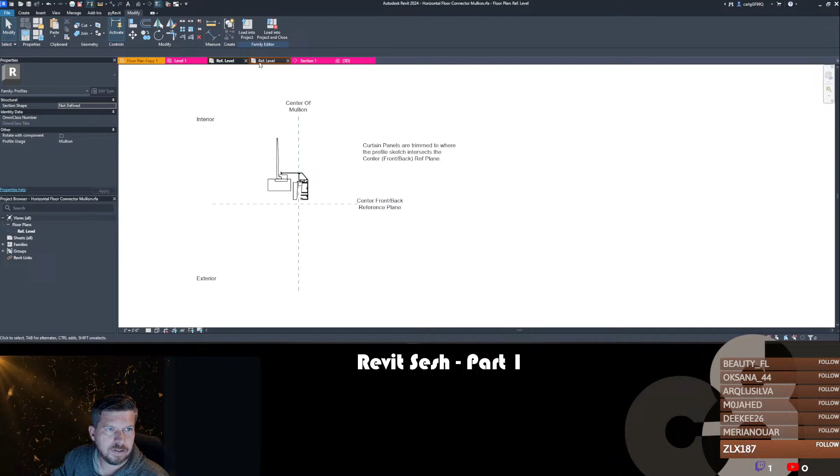Panel. Oh, you know what? I think floor connector mullion, angle, offset, width, aluminum, blah blah blah. I feel like there's an offset somewhere here that I'm missing. Facing exterior. This thickness. Hit it? Or what?

We're going to call that 1 inch. You know what? No, we'll call it 15/16 of an inch. Okay, so we can make a new panel type if we want it to have double layered. Oh, that is 1 inch thick. Okay, and where is that in relationship to?

16ths. Okay, so what we need to do is we need to set this offset. We either need to fix our offset here, or we need to just offset this to be closer. And I think what's happened here is our curtain wall type here is set to the middle, the wall curtain, the center line instead of the exterior of the glazing.

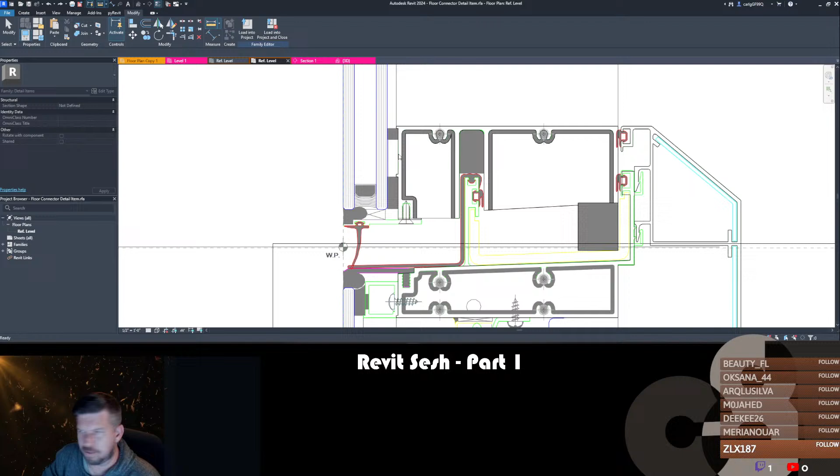No, that's not quite right. Is that 1 1/4 inch? Maybe that's from here to there. Is that one? No, that's 2.5 inches. We'll figure this out. What if we said, so thickness is 5 inches, profile default. System mullion rectangular. Offset. What if I do this, -0 to 2.5 inches? Okay, close enough. Right, so there we go.

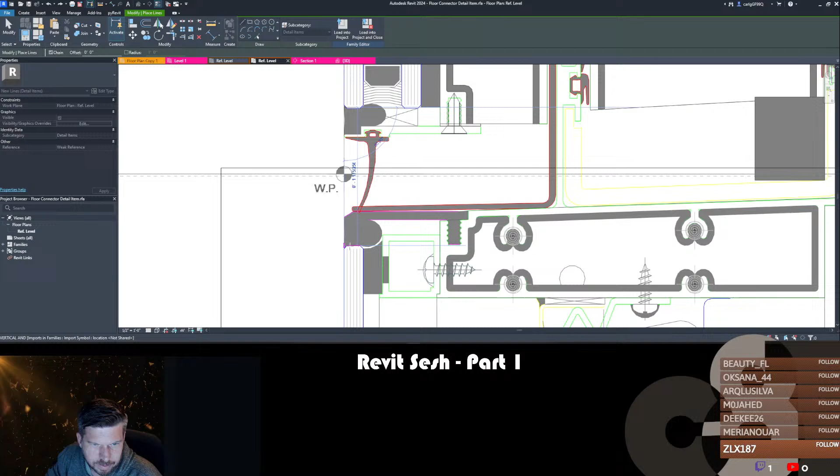So we've got that. Now the issue that we're running into is that our panels don't quite have this offset with a profile. I think we can fix this by coming back in here. I think what we need to do is I'm just going to create a reference here for the piece that will create the thickness in our profile between the panels. Oh, that's a spandrel piece too. Okay. Hello, Revit. There we go. All right, I'm going to load that in. Nope.

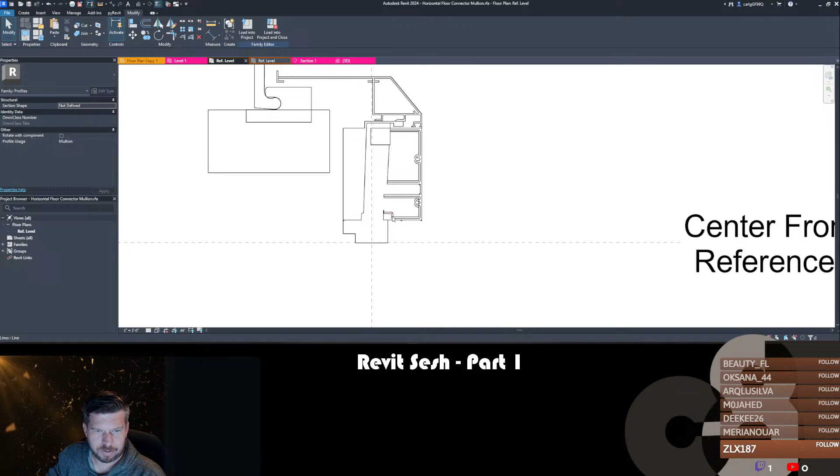Oh, I messed up my loop. Fix my loop. So all that means is that, see, I've got 2 loops now. So I need to go in and do this here. And so it looks like this interior loop here, I'm going to have to get rid of that if I want this to work. And I'm going to do that for now. You can go in and edit that if you want.

Oh, I should have, like, mullions on grid line. Okay. So yeah, you can see now the panel breaks at that mullion, right? So if we look in our section, oh, I need to turn that off. What in the world? I forgot that I left this turned on. You know what? I can just hide it. So visibility graphics, we're going to turn off imported categories. Okay, so now our panel breaks at that.

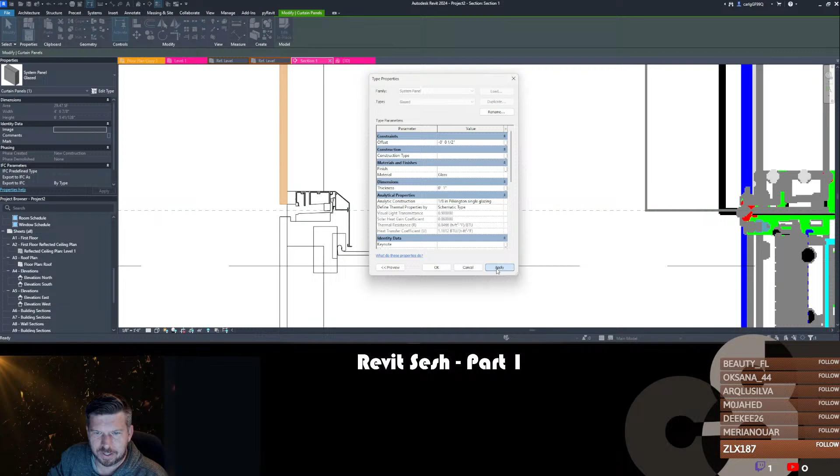It looks like I still didn't quite get it. Oh, wait. Okay, so now our panel for some reason is offset. Thickness 1 inch, default glass offset. I don't know why I have to do this, but it looks like for some reason it wants me to offset the panel. Maybe the panel is set on the origin of the panel. I think this is a system family, I can't edit this family. I would probably make a family specifically for this.

So this is our regular glazing. This is going to be our spandrel glazing. So we can make a new type. Duplicate it. Spandrel. The offset for this is going to be negative 0.25 inches because it's going to be ½ inch. Okay. So there's our spandrel glazing. And then we just kind of repeat this over and over again, right? So we'll bring this up to whatever our spandrel height is. It looks like that'll be right here. And then our next floor connector would be wherever we put that.

This doesn't get you completely where you want to be, but I think it gets you started. Let's see if I just do this. Bring this up to here. Just repeat this detail on the second floor here. And then I just select all the mullions on this grid line. Oh, I pinned them. Floor connector mullion. Make it continuous. There we go. And this panel along that whole thing becomes spandrel.

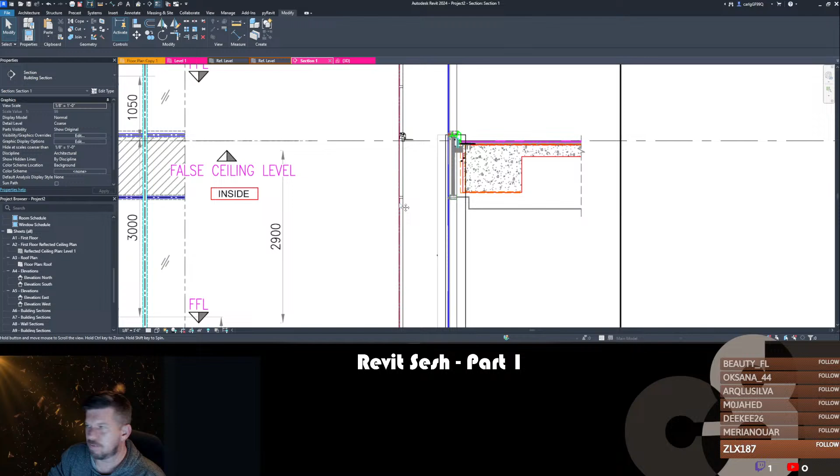You can get extremely detailed with this, right? You can make panel systems within panel systems within panel systems. But yeah, like what Dum Dum and Sketchy are saying, you don't get too many clients that request this level of detail. If you're working for a facade company and you want to show this in a Revit model, this is the way that I would approach this. You would go in and make this detail. Now, actually, I'll be honest with you, you're only going to need to show this detail in one view, right?

So what I would actually do is make this detail component. So I'm going to delete this DWG, and we're going to save this and load this into my project. And then I'm going to remove the detail component from my mullion profile. Save this, load it in. Okay. And I'm going to create a detail view specifically for this detail. And now I'm just going to drop that detail component on top of that, and turn off curtain wall mullions. And then I've got my detail exactly the way I want it. So that's probably how I would do this.

Okay. Yes, it's really nice to be able to just cut a section anywhere and it shows that detail. But documentation just doesn't work that way yet. It'd be kind of nice, but this is how I would probably do this today. So, all right, that was the first 3-hour session. I think we're going to do a couple of others.

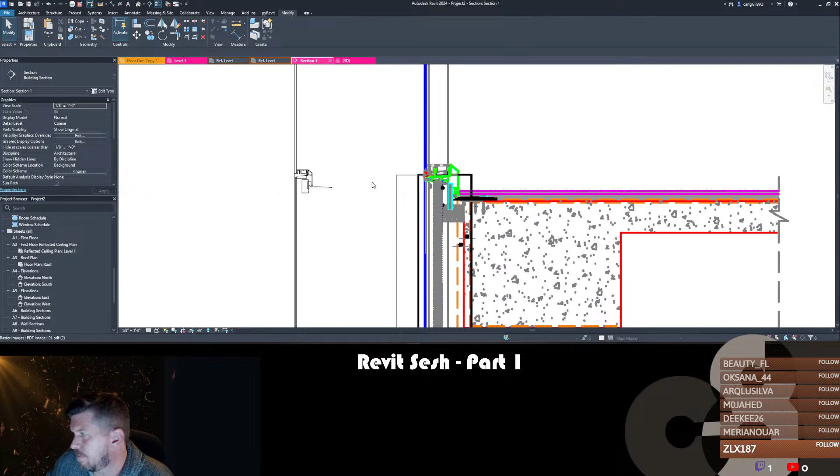Right, you'd only need it once. Hopefully, you're not showing this detail multiple times. That's inefficient documentation. Showing it here and here, that's okay, because you want to show that from one floor to the next it is the same, and then you're repeating that module. But you're not going to cut it here, and then here, and then here to show that.